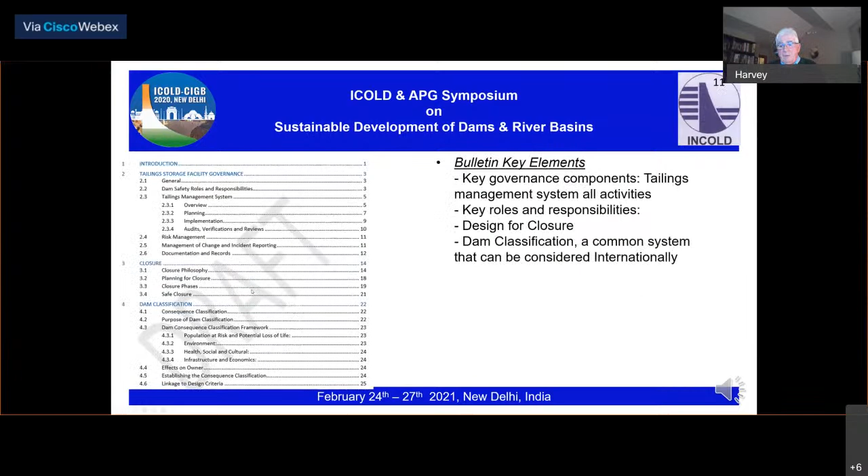They can vary from very brittle, sensitive slime tailings, like at Brumadinho and those failures, or you can go to hard rock tailings. So there's many different types of tailings, and we have categorized them into 5 different categories. Understanding the properties of your tailings is a key element in a safe tailings dam design.

I guess the most meaty part of the whole bulletin is on design. The design is critical. With a good design, you have very few problems during the life of a mine. So starting with a very good design is really an important element of tailings dam safety.

So we cover the different life phases from site selection, technology selection, through to design, construction, and all the way to closure, and finally safe closure, as we use the term.

A key element in all of the design is risk informed. You want to understand how the dam could fail and be designing your dam to prevent that. If you think about it, the main dam failure modes — dams fail on foundations, like Mount Polley and Aznalcollar in Spain.

They can fail by overtopping, like Baia Mare and other projects. They can fail with broken decants, releasing materials. They can fail within the dam itself, which was the liquefaction failures in Brazil. And there's natural hazards — you can have landslides and, in northern climates, snow avalanches.

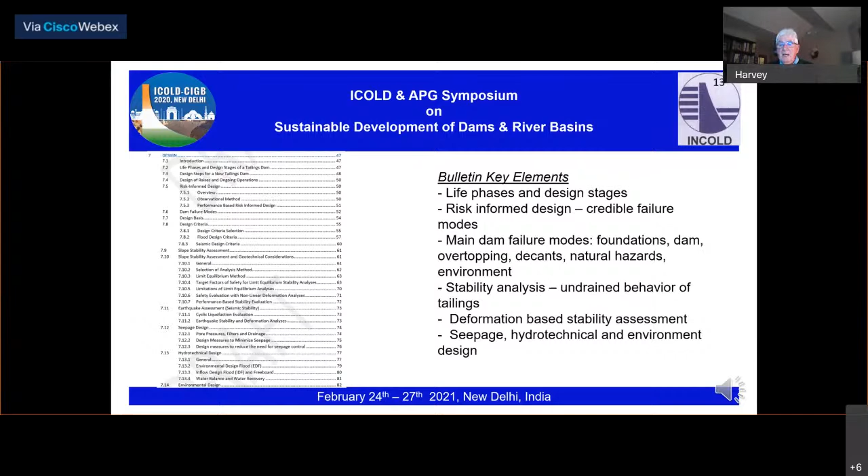So the practice of using drained factors of safety is not correct or practical for tailings facilities. We'll get into deformation-based analysis — you can look at deformation for designing your dam as opposed to factors of safety, or in conjunction with it. And certainly seepage and hydrotechnical environmental design.

So the next sections cover risk management and dam failure analysis. This is looking at what can go wrong if the dam starts to fail. What are your trigger action response plans for how you may respond to things?

Also, when we look at how tailings dams fail, they're remarkably different than water dams. Water dams, if the dam fails, all the water goes out. With tailings dams, they don't — some may have more go out, and some may have very little tailings go out.

So there's really two mechanisms. You've got the water transported tailings — if you have a cubic meter of water, it could wash away a cubic meter of tailings. Secondly, there's what I call the geotechnical mechanism: if there's potential for liquefaction or unconsolidated tailings near the upper part of the tailings facility, those can flow. And then lastly, emergency preparedness and response planning in the event that something does happen.

The other key elements we cover, and these are the last few, are the construction aspects, having good QA/QC, and probably the biggest, or a significant issue there, is having good as-constructed records of your dam — not just geometry, but knowing the geotechnical conditions all the way through your dam.

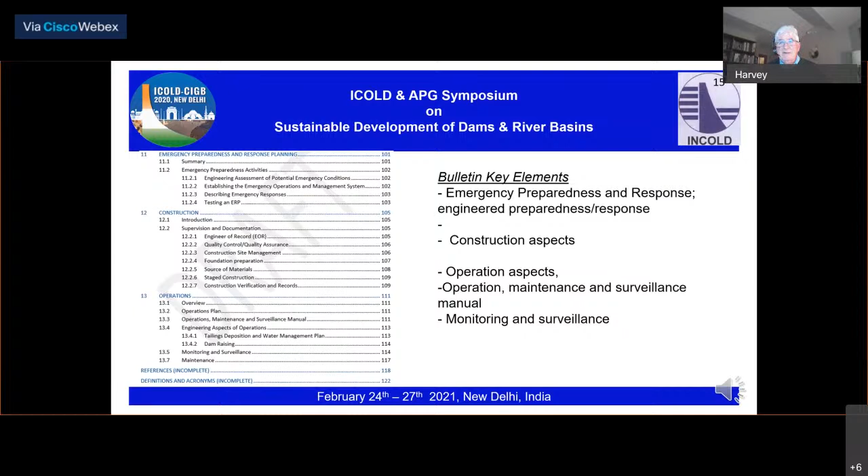So in summary, the Dam Safety Bulletin covers comprehensive components of dam safety and governance. It's aligned with the global standard and ICMM guidance, and it's to be submitted to ICOLD Central Office for approval in Marseille and ICOLD later this year, COVID willing. So we hope that goes well. And that concludes my talk. So thank you very much.

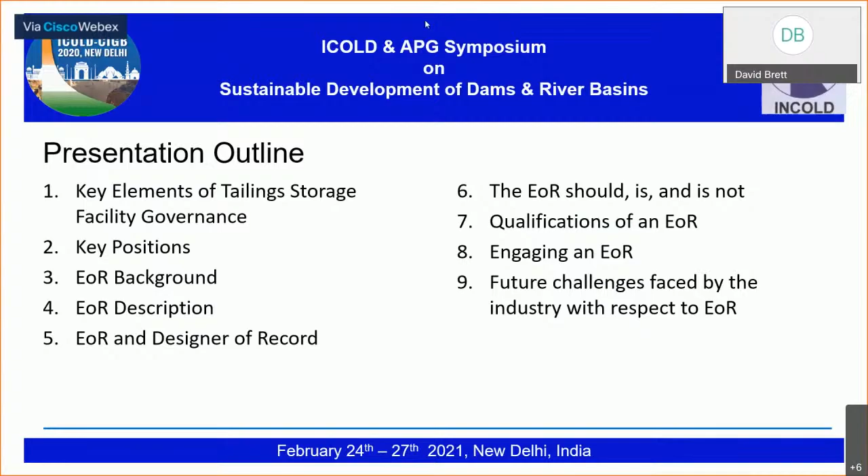We've lost you, Andy, you have no sound. So Harvey, yeah, maybe you could run the presentation from the server. Okay, let me just... So for those of you that are listening, sorry, the internet I'm working from is a bit spotty, so I have pre-recorded the presentation and Harvey's going to play it on his improved internet. Yeah, okay, let's see if technology works, Andy. So I just press slideshow and start. Yeah, share your screen. Yeah. And then just press slideshow. I don't know if there's sound, Andy. Okay, no, I don't. Okay, so I'll take the sharing back. My apologies, I'll take the sharing back and I'll just run it through. Okay, and hopefully it'll work.

As I was saying, there's several items in this presentation dealing with key elements of tailings storage facility governance, but truly what we're focusing on is engineer of record, with description, qualifications, and how an EOR should be engaged.

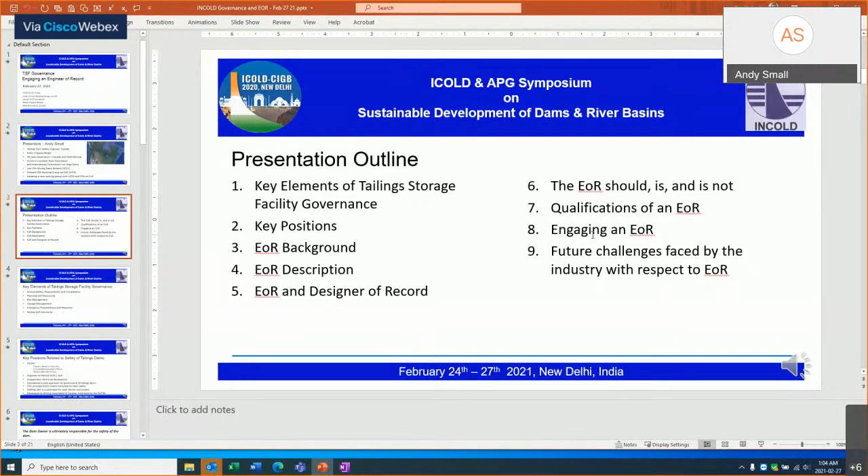How's the audio now, David? It's good, Andy, it's good. Okay, thank you, okay.

In terms of key elements of the tailings storage facility governance, there's accountabilities, responsibility, competencies, planning and resourcing, having a risk management program, a change management program, a plan for emergency preparedness and response, and review and assurance.

Key positions related to the safety of tailings dams include the owners group, which has a board of directors, accountable executive officer, responsible site person. Then there's the engineer of record, typically a consultant, and independent technical reviewers, which support the owner. This approach has been considered a solid approach for governance of tailings dams.

Within the Canadian Dam Association, as part of the governance guidance we've provided for engineer of record, we've developed a RASCI matrix. RASCI stands for Responsible, Accountable, Support, Consulted, and Informed, and that template is available for you. It has 55 best practices for tailings management and dam safety management, and it allows you an opportunity to identify the roles and responsibilities of the different positions. In doing so, you can develop a staffing plan customized for every owner and every project.

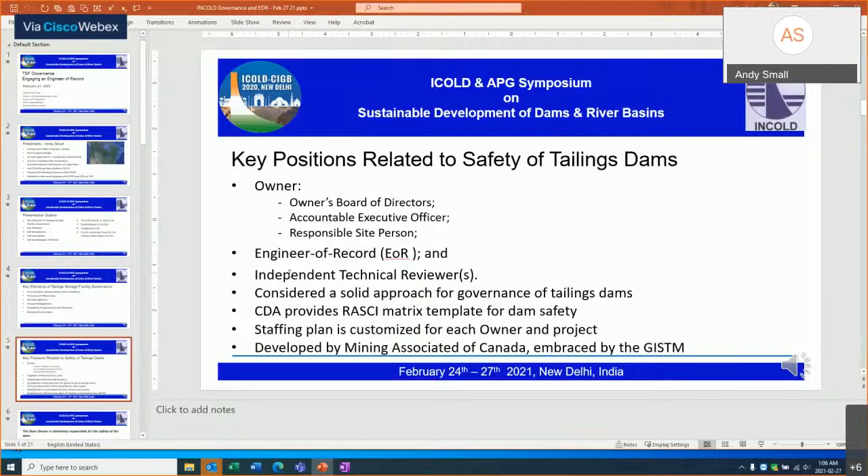This whole approach was developed first by the Mining Association of Canada and is embraced by the GISTM. I am not activating the slide view on purpose because of the audio recording interfering with what I'm doing now.

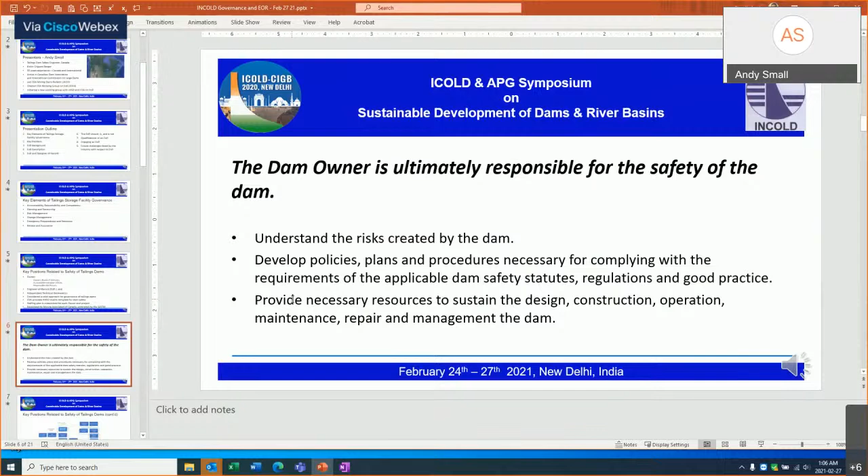So the dam owner is ultimately responsible for the safety of the dam. They need to understand the risks created by the dam. They develop policies, plans, and procedures necessary for complying with the requirements of the applicable dam safety statutes, regulations, and practice. Now, obviously, the dam owner has to provide the necessary resources to sustain the design and so on.

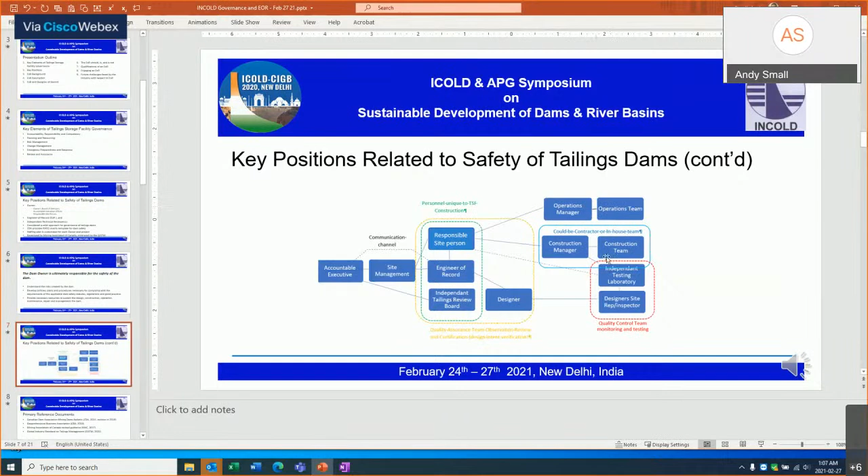There's a number of documents that have been developed related to governance and engineer of record. We first formalized the engineer of record concept in the CDA bulletin that we issued in 2014. The Geoprofessional Business Association in the United States then took that concept and advanced it further. The Mining Association of Canada did the same. When these two organizations made their progress, we in the Canadian Dam Association cycled back and did a major revision of our governance and EOR section of 2019. All of that was then used by the GISTM. So what was presented in GISTM is an extension of the previous work.

As I said, the EOR concept was initially formalized in 2014 in our Mining Dams Bulletin in Canada, and it was done so to provide continuity. As Harvey said, at Mount Polley, there were 5 different engineers of record involved, and that was viewed as part of the problem with the facility. We saw the same at the Samarco Dam failure. There are other examples of that. So the EOR concept fundamentally was to provide continuity.

It's related to the dam safety aspects of the site. It makes a big difference with risk management. It assists the overall risk management program on a site, and therefore improves the project performance and dam safety.

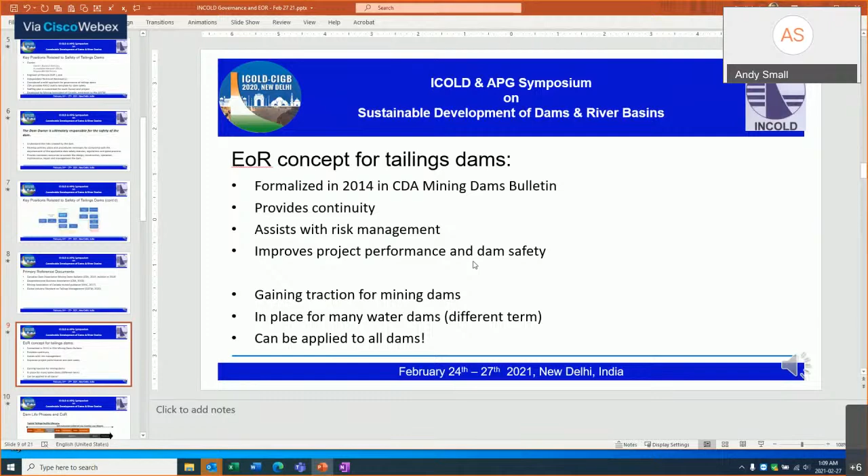This concept has been getting a lot of traction for tailings dams and for mining dams. In many places, there are many sites with a number of dams, not just tailings dams. There can be water dams, water treatment dams, and so on. Many sites are now adopting EORs for all the dams on their sites, not just tailings dams. We also recognize that our colleagues in the water dam industry typically have this type of position as well, but they may not actually call it engineer of record. They may call it something like a dam safety engineer. But we believe that this concept can be applied to all dams.

When we look at the dam life phases and the EOR involvement, the EOR should be involved from the initial design and construction through commissioning, and if there's further designs and construction for raises of the tailings dam, and out into closure. The question is often asked, is an EOR required for closure? And the answer is yes.

So within the ICOLD document, we have a description of the engineer of record. We state the EOR is responsible for advising the owner and other appropriate stakeholders as to whether the TSF is designed with appropriate concern for health, safety, and environment, in alignment with the current state of practice and in accordance with applicable regulations, statutes, and guidelines. The EOR further advises the owner whether the construction of the facility conforms to the design concept and provides critical support during operations.

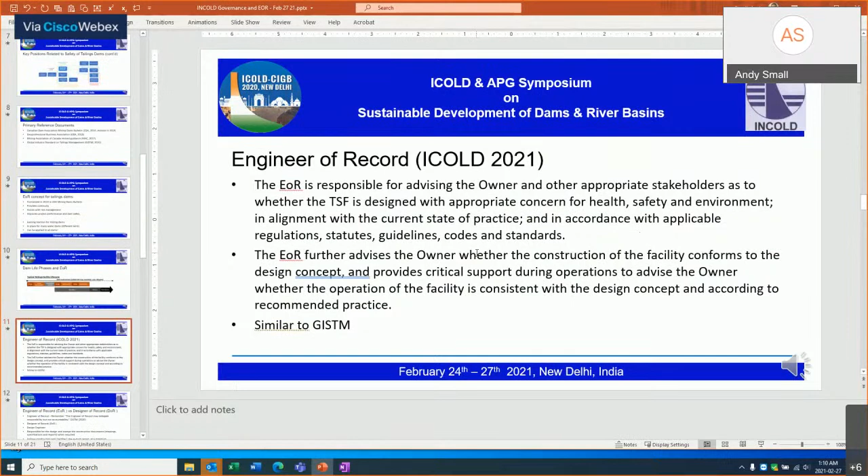Now, in the past, in the Mining Dams Bulletin of 2014 of CDA, we said that the EOR was responsible for the safety of the dam, and that's incorrect. The owner is responsible for the safety of the dam, and through these functions, the EOR provides support to the owner and effectively becomes a partner with the owner. So the ICOLD document provides more information on that. The Global Industry Standard on Tailings talks about it as well. There's obviously MAC and CDA has it, but the definitions are all very consistent.

I indicated earlier how the designer of record and engineer of record may not be the same. There are many times the engineer of record is the same as the designer of record, or is the lead designer for a particular tailings dam or a raise, but not always. There are many cases where the engineer of record delegates that responsibility to the designer of record. The designer of record is also referred to as a design engineer. The designer of record is the one that's responsible for the design, stamps the construction drawings, specifications, and reports, and so on. The design engineer, designer of record, then follows the construction, provides support during the construction, and certifies the as-built report.

Now, if the designer of record is different than the engineer of record, the engineer of record may delegate that responsibility but cannot release that accountability. The engineer of record still retains accountability for the overall safety.

There are many different models for the roles of the designer of record and engineer of record that also account for situations where the designer of record may work for a different firm than the engineer of record.

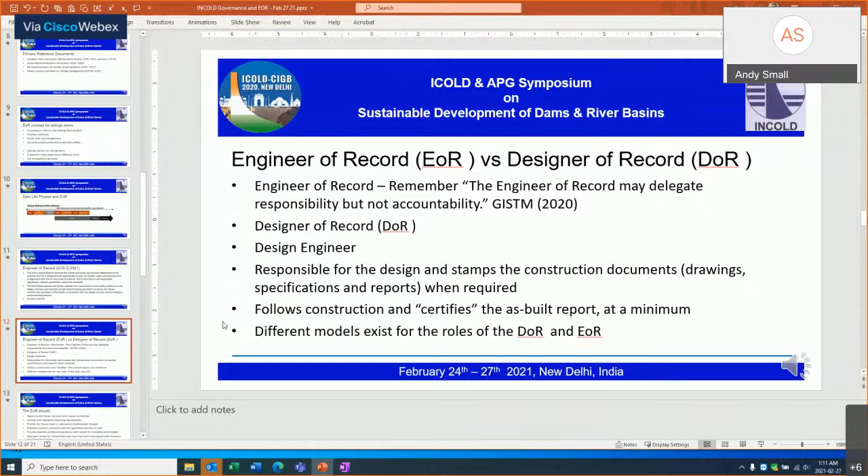The engineer of record should report to the owner concerns they have with respect to the dam, ensure the dam system complies with regulatory reporting requirements, provide the owner input on planned or implemented changes, maintain practices consistent with the applicable standard of care, and provide objective professional guidance with respect to innovative technologies.

Some innovative technologies are suitable and others are not. The EOR should seek peer review for critical items and input from technical experts with necessary specialized knowledge. EORs need to park their ego at the door.

The EOR is an integral part of the dam safety risk management team. As I said earlier, they're a partner, a trusted advisor. It can take time to develop that relationship—maybe 1 to 3 years—but ultimately you become a partner and a trusted advisor.

The EOR is typically an individual supported by a firm and a team of dam safety specialists. There are some areas where the EOR is viewed as a firm rather than an individual, but within ICOLD, the GISTM, and CDA, we clearly say the EOR should be an individual. That individual is likely not a sole practitioner; they need a team of specialists supporting them as they undertake their responsibilities.

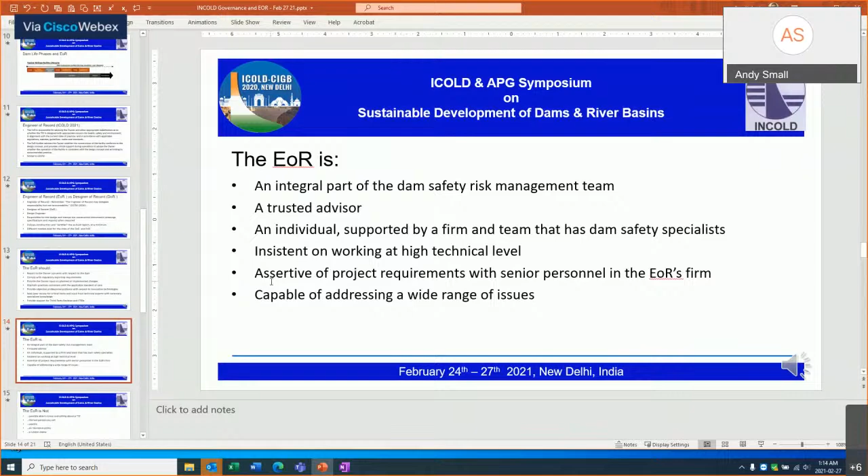The EOR is capable of addressing a wide range of issues and is much more than a designer. The EOR has to deal with operations, maintenance, surveillance programs, closure, training, competencies, and management, and must have an awareness of all these issues to do their job.

The EOR is not the person who knows everything about a TSF. The EOR is not on site—they're typically a consultant, so they can't know everything about the TSF. The people on site, the responsible person and their supporting team, are integral to this, and that partnership is necessary to handle all the issues about a TSF.

The EOR is not the last person you call, not the person who gets the call when there's already a problem. Typically the EOR is advised early on. Our best day is when a client calls and says, 'We've got something a little different happening on our dam, we'd like to advise you about it,' and the EOR says, 'I hear you, thank you for your call, but it's really not a big deal.' Many trigger action response plans show the EOR engaged very early in the surveillance program when abnormal conditions are observed, so they're not the last person.

The EOR is not psychic—they cannot read the owner's mind. So communication with the EOR is very critical, typically involving calls every week or every month with the client discussing the dam safety programs.

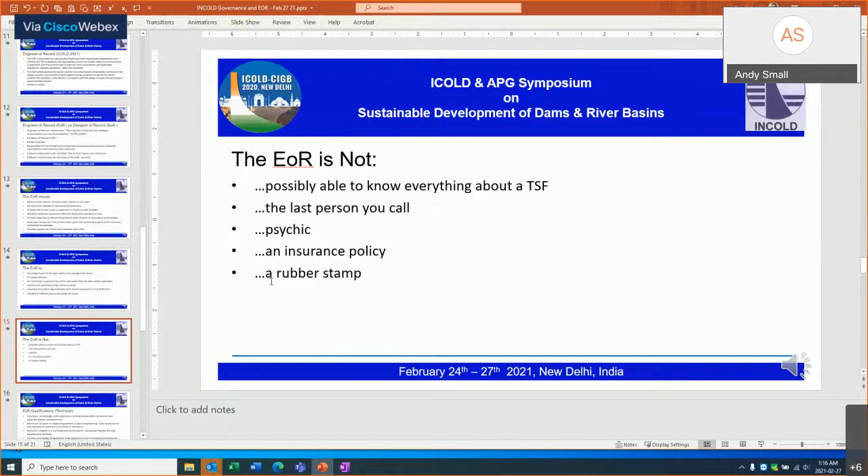So I have two slides related to qualifications. The first is on the technical aspects, and the second is on the non-technical.

From a technical perspective, the EOR needs to have the education, knowledge, and experience commensurate with the complexity and potential failure consequences. So when you read the MAC guidance and GIS-TM guidance, this is what it says. However, within CDA, we suggest there be a minimum of 10 years of related experience in dams engineering, and obviously that minimum needs to be higher for dams in the very high and extreme consequence categories. As I said earlier, the EOR has to have a breadth of knowledge, not just design - they need to understand construction and operations. Those are critical aspects in the education of the EOR. Many companies providing EOR services now are developing training programs for their staff to understand the different aspects of dam safety.

EOR needs to have a bachelor's degree in civil engineering, typically geotech. There are occasions when a hydrotechnical engineer may be able to take on the EOR role. It's not unusual - it's just that I think the vast majority of EORs are geotechnical engineers.

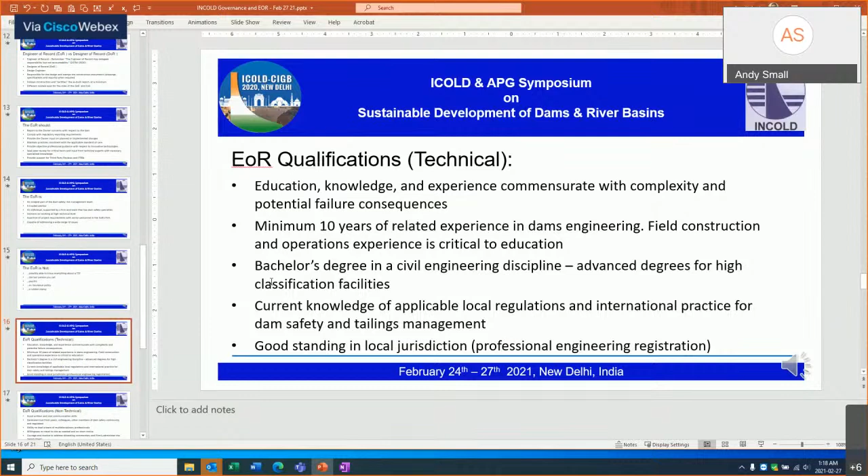In particular, high classification facilities warrant advanced degrees. The EOR needs knowledge of applicable local regulations and international practices, and they need to be in good standing in their local jurisdictions. In many countries there's a professional engineering registration process, and they need to have their PEng designation. But not all countries in the world have that designation, so that's why we write that the EOR needs to have good standing in their local jurisdiction.

With respect to non-technical qualifications, the EOR needs good written and oral communication skills. They need to be able to generate trust from their peers and colleagues, other members of the community, and regulators. Many of our dams require multidisciplinary teams, and the EOR needs to be able to lead that, go to site, have the courage to deal with dissenting commentary, and firmly administer the design intent - all of which requires a high degree of emotional intelligence.

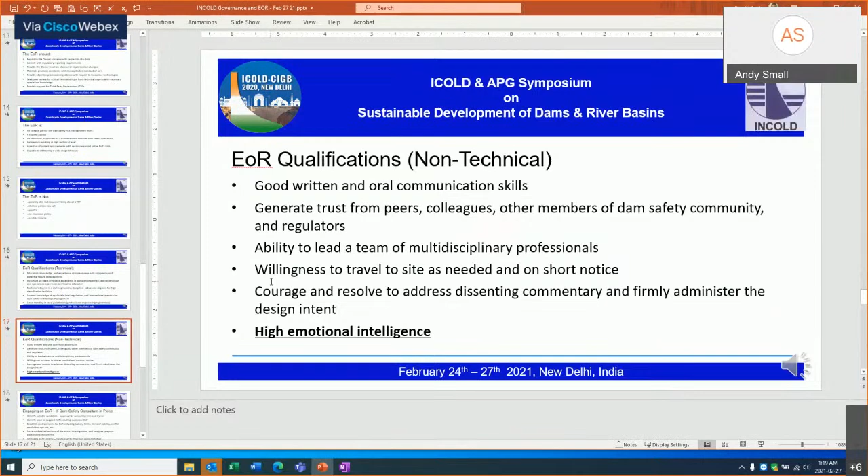Contractual terms need to be defined, including the battery limits - which dams are in and out of the scope. The limits of liability are very important. We're aware of some companies, some owners, that are now waiving the limitations of liability from their contracts. They are not expecting the engineer of record firm to be held liable for problems associated with the dam. They're doing that because they know of the concern that many consulting firms have with regard to liability transference, and therefore their hesitation to become involved as engineer of record.

And the companies waiving those limitations of liability are doing so because what they want to focus on is the partnership and trust aspects of the EOR, and not have the elephant in the room related to liability issues.

There should be a conflict resolution mechanism, because there will be times when the EOR and the owner do not agree, and what's the process for resolving those conflicts, as well as the conditions under which the EOR or the owner can opt out of the agreement. So all those things need to be sorted out.

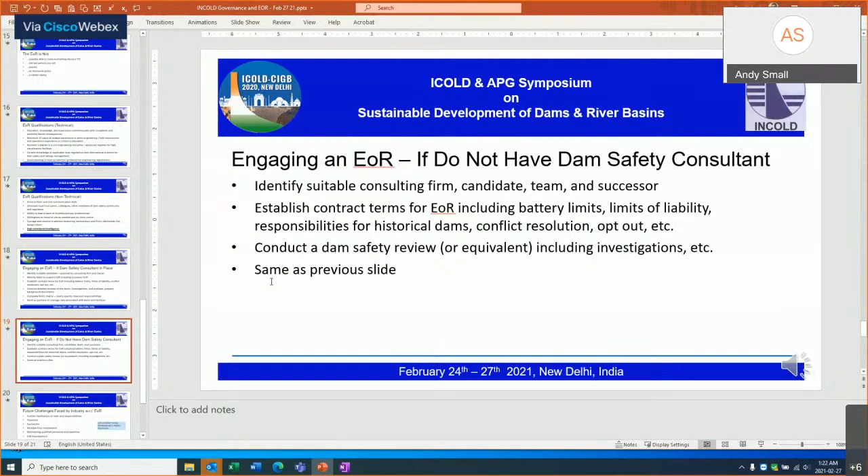In this particular case, that third bullet may take between 1 and 3 years before the EOR team and the EOR are satisfied that they understand enough about the dam, understand the risks associated with the dam, before they can formally take on the EOR role. Otherwise, it's the same as the previous slide.

So the Canadian Dam Association and the United States Society of Dams are now forming a working group to address these issues. We had one webinar in December of 2020. We have additional webinars and workshops planned for the upcoming year. So that is my presentation.

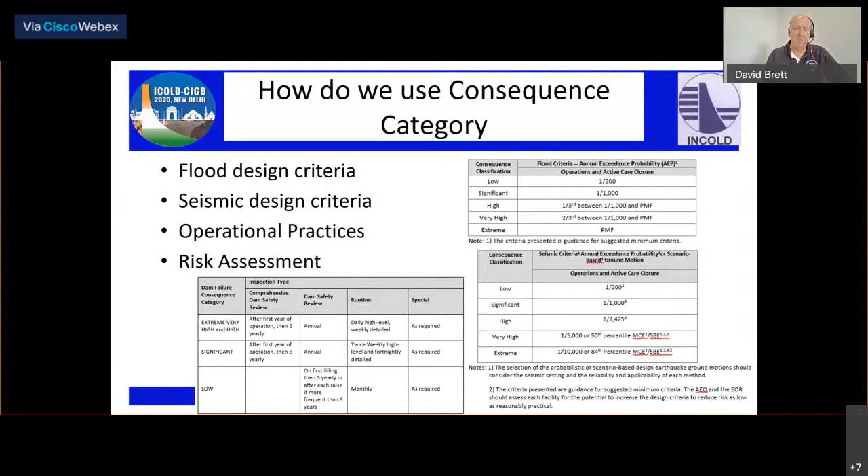But this is the secret of determining a good consequence category: first identify the credible failure modes. The sort of failure modes we might consider would be instability due to foundation failure, which could be caused by weak material, incorrect strength assumptions, incorrect seismic hazards (bigger earthquakes than expected), and unexpected pore pressures.

This really focuses on needing to forget about likelihood. We're not looking at something we might expect to happen fairly easily and then talk ourselves into thinking it's not going to happen, so it's not credible. We really need to think there could be factors like weak zones that we haven't interpreted properly, and that does cause the failure.

And if it did, well, what are the consequences? When you do that and find that consequences are high or extreme, it focuses your attention that we really need to do a thorough geotechnical investigation to make sure you understand the foundations as best as you can.

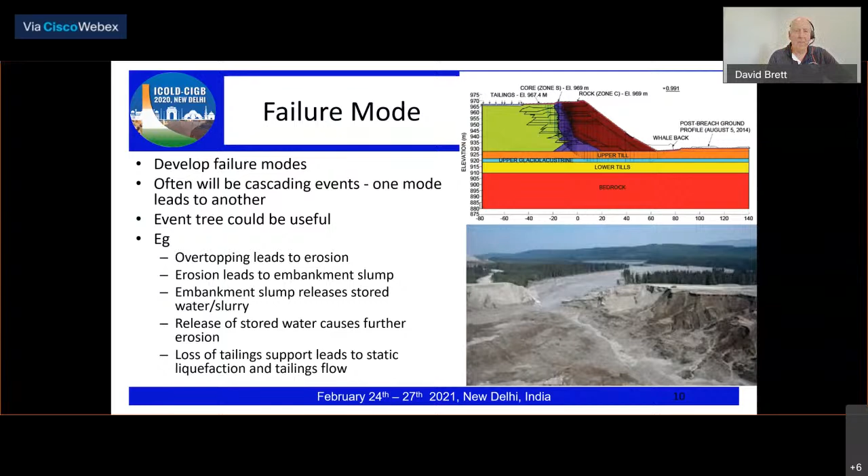Like Harvey mentioned before, tailings dam breaches can be very different to water dams. If there is water in the dam, then potentially the initial flow of material out of the dam would be water, but potentially taking a lot of tailings with it. This approximation of 50% solids density is quite often made.

And once that occurs, we could then get a slump of higher density material. So there could be a liquid flow phase that would travel a long distance, and then there could be more of a landslide type of failure mode that might be more localized, but very, very deep. So those things need to be looked at.

We also look at a couple of different cases for dam failures. First of all, a fair weather or sunny day failure, which is where there's no unusual water on the dam and no downstream flooding. So this would be pretty much normal operating conditions, and you'd need to look at what credible failure modes you might have in that situation.

So that photo on the right, that's the Mount Polley Dam in Canada, and that is a good example of a sunny day failure. There was no water on that dam or nowhere near the failure. It was just a slump of material that occurred.

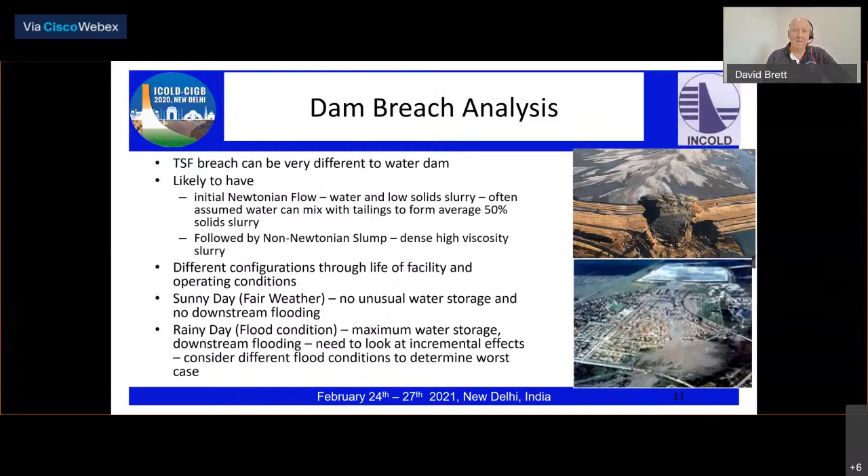We really have to remember that this is a developing science and we haven't got an agreed model methodology. There are a lot of people developing models, and you can probably buy some computer programs that claim to do various things, but at the end of the day there's a lot of variables and we really don't pretend to understand everything as yet. So we need a lot of engineering judgment when developing these dam breach models.

We can vary from the very simplistic method where you might assume that everything was water and it flowed out like water, which is probably going to get you a very conservative extent of flood in terms of the area covered and the distance, but it's probably going to be very conservative and unrealistic.

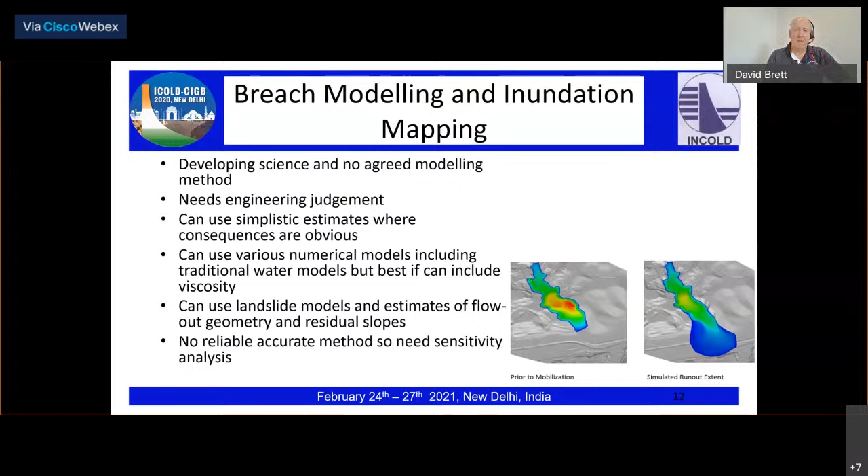So once we've done this flood mapping, we can then define the inundation areas. We can count houses or look at populations or industries that are in the flood zone and estimate the population at risk.

We can also use various methods to calculate the potential loss of life, and this is very influenced by warning time. We have to be careful we don't use some of the rules developed for water dams, because in water dams, a depth of water less than 0.5 metre and flowing at less than 1 metre a second is thought unlikely to wash people over and cause them to drown or lose their life. But I think you have to recognise tailings are different, they're much denser and more force is involved. So we just need to be careful not to use some of these water flood criteria.

And then we also have to look at the damage to the environment and the community infrastructure, etc.

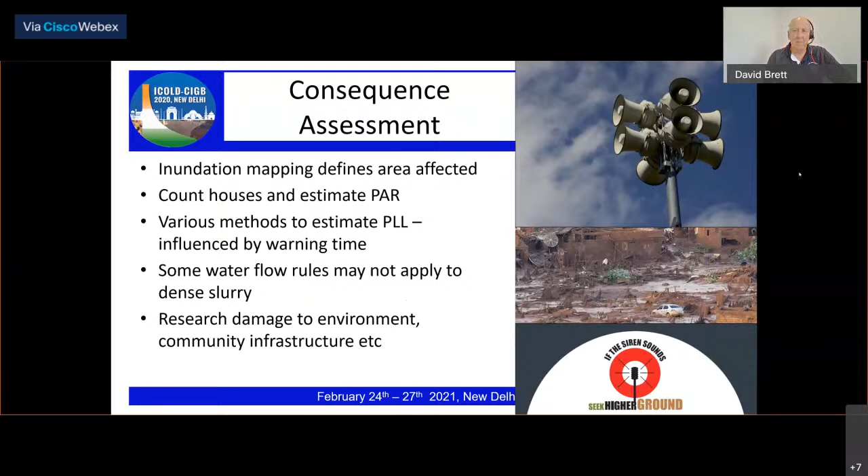One of the other uses for dam breach analysis is for emergency planning. There's a bit of debate about this - what dam breach should you use for your emergency planning? As far as emergency planning goes, it's probably not necessary to use the most credible failure mode that is very extreme.

If you've done your designs and can handle a probable maximum flood or something like that, you might be able to come up with a flood, a seismic event, or a failure of whatever kind that is maybe more realistic in terms of doing your inundation mapping for emergency planning. So you just need to do a bit of sensitivity analysis, looking at different flood cases to see what's a realistic thing to look at for your emergency planning.

Things you might consider when looking at your flood extent would be warning times, warning methods, safe areas, emergency access and escape routes, response method and equipment needs, and lists of agencies and contact details.

So, once again, it's just a matter of developing an emergency plan based on a realistic scenario, rather than something that is pretty much very, very unlikely. It depends - you might need to consider the effect of that, but make sure you plan your resources appropriately.

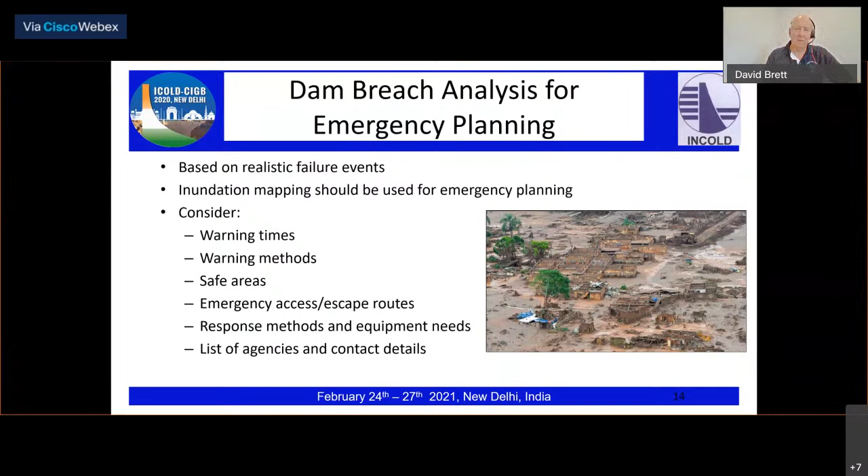So the consequence category is something that does become publicly known. We need to be educating the public to understand what that really means - it shouldn't be related to risk, and needs to be taken as what is the worst possible outcome. But hopefully we can demonstrate to the public that the consequence category has been used to drive down the risk so that it's very, very low for some of these extreme consequence dams.

And it's important, in my opinion, that when considering the consequence category we don't try and drive it down to reduce that public outcome. If we've got an extreme consequence dam, we should recognise it and develop our designs appropriately. It'd be silly to try and drive that category down so that we ended up with lower design parameters and actually left it with a higher risk than otherwise.

So, to me, having a conservative consequence category allows decision making to reduce risk, and that's what it's really all about. So thank you, Harvey.

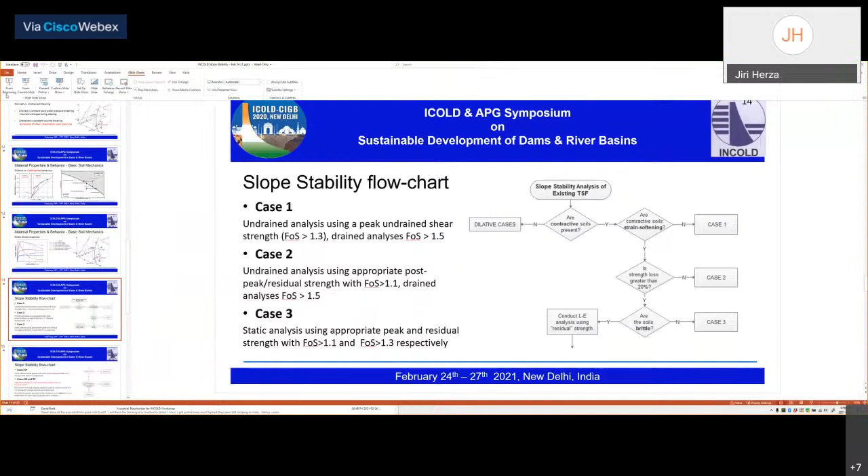So I'll share the screen. Okay, I can see it now. Thank you. Okay, thank you, Javi. Let's get into it.

As Javi said, I'm currently in Czech Republic finishing my PhD studies into soil mechanics, closely related to tailing slope stability. I don't want to talk too much about myself, so let's move on to the next slide.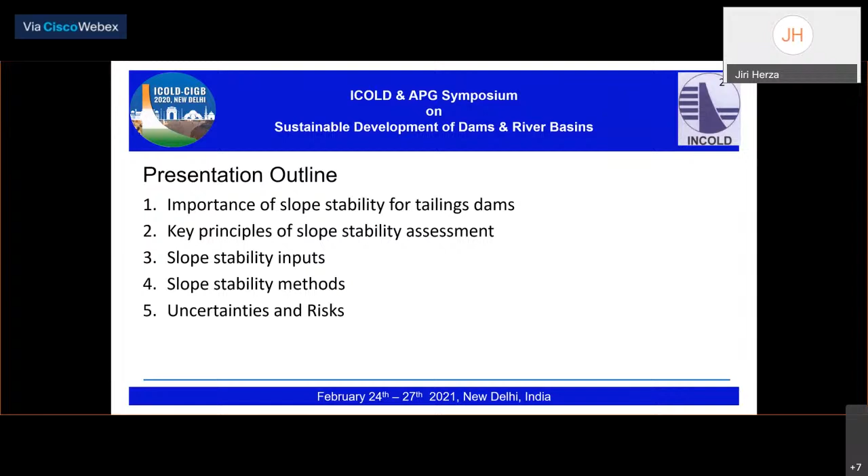Today I'll be presenting a short presentation on slope stability assessment. I will go through why slope stability for tailings is important. We'll explain some of the key principles of the assessment, what inputs we need, what methods we use, how we assess the outcomes of risk analysis, and I'll briefly touch on uncertainties and risks associated with our slope stability assessment.

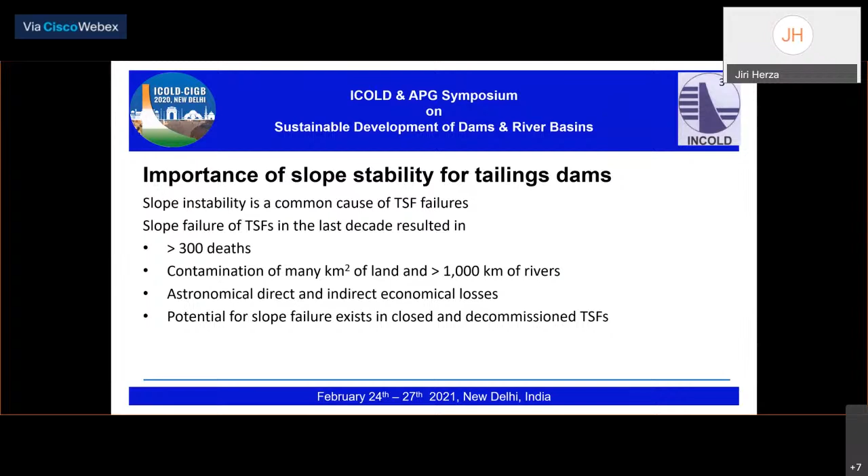Slope instability is one of the very common causes for tailings failure. In the last decade, slope instabilities resulted in the deaths of more than 300 people, contamination of many square kilometers of land and long stretches of rivers, and indeed astronomical direct and indirect economic losses.

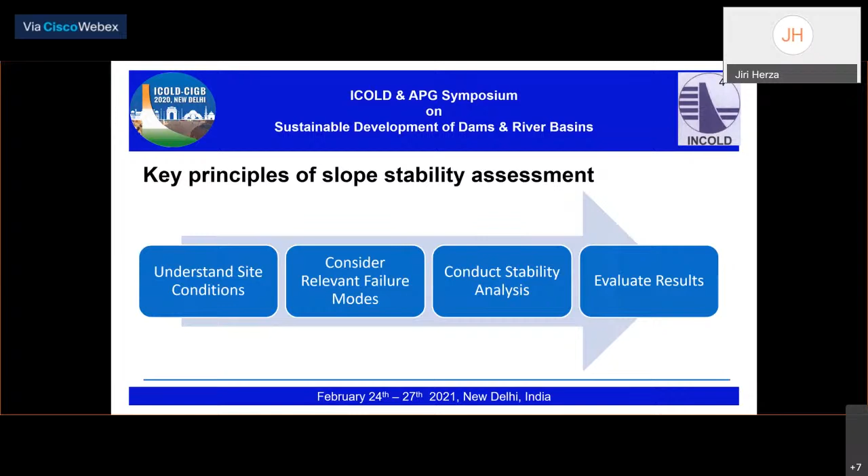What's important when we run a stability assessment is to understand that it's not just a calculation. The calculation is part of the process of the assessment, but the assessment itself is a number of steps joined together. First, we have to understand the site conditions. We have to understand the relevant failure modes and consider those in our assessments. We then run through the stability assessment calculations, the stability analysis, and then we need to consider the outcomes of the stability assessment.

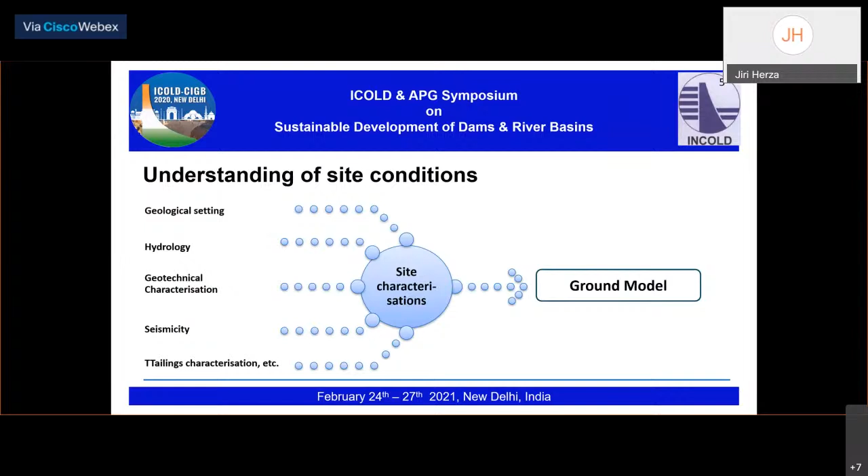So when we put together a ground model, we basically compile all relevant site conditions. The ground model is a reference point that is used to feed information about our site into our slope stability assessment. After we set up the ground model, which contains information about the geology, geotechnical conditions, seismicity, hydrogeology, groundwater table, and other important factors of our site, we can go into further detail.

We then go into a slope failure selection, because we need to understand what cross-sections and what parts of the tailings dam we might want to consider for slope stability. Different sites, different locations, or breaches in those locations might have different consequences. So selection of the sections and geometries which we are going to analyze is very important.

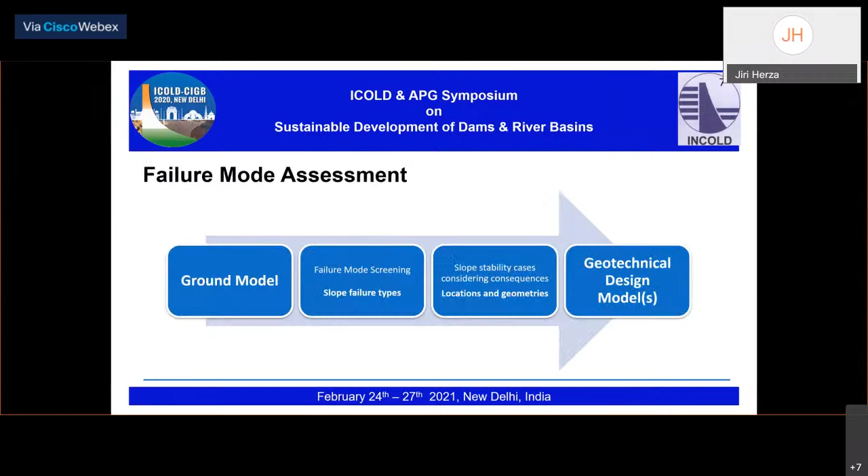Then we go through the slope stability cases for those different consequences, and we implement them in a geotechnical design model. The geotechnical design model is a modification of the ground model, and the modification is in the adoption of the geometry we are interested in, and in the material zoning that is relevant to our failure mode and the location of our assessment. So from ground model, we go to a geotechnical model, and then once we have the geotechnical model assembled, we can run the stability analysis.

The stability analysis is the numerical evaluation of the performance of the slope stability of our dam based on the geotechnical design model we have selected. The calculations might be run in a number of environments. We can run a limit equilibrium, which is still the most common software package or method used. We can use finite element analysis or finite difference analysis, depending on the input parameters and importance of the structure and what we want to get out of our analysis.

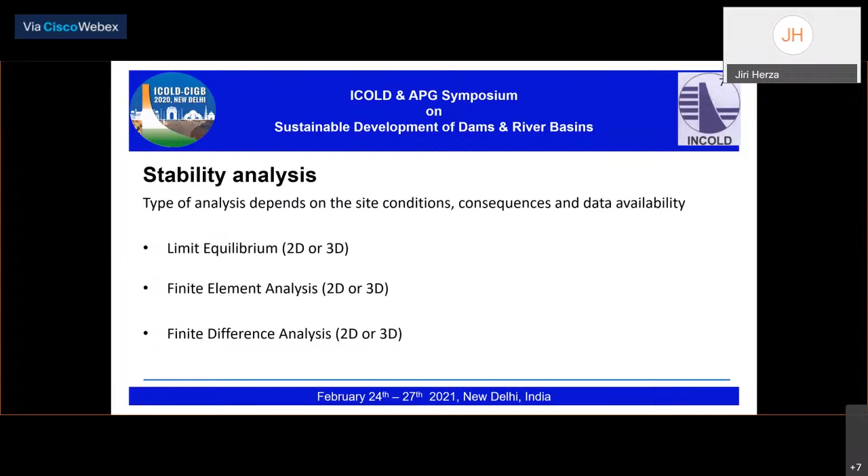The next step in the slope stability assessment, after evaluating the factor of safety or deformations of our slopes of interest, is to evaluate those results. What evaluation typically involves is a comparison of the results with the minimum or target requirements taken from international guidelines, bulletins, or local requirements defined by government.

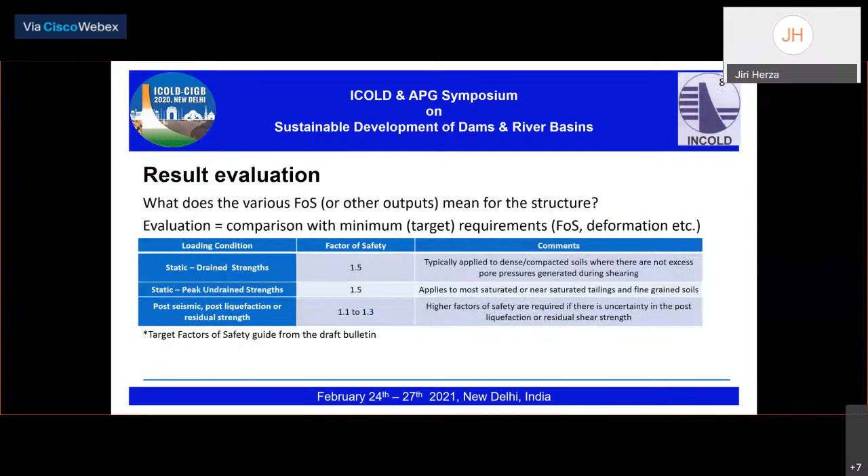In our draft tailings bulletin, we suggest that the minimum factors of safety are as per the table now shared on the screen. For the static drained conditions, we target a factor of safety of 1.5. For peak undrained conditions as well, and the post-seismic and post-liquefaction cases using residual strength or post-liquefied strength of the tailings, we have a range of 1.1 to 1.3, with the higher factor of safety required for cases where we have high uncertainty in the shear strength parameter used for the post-liquefaction case.

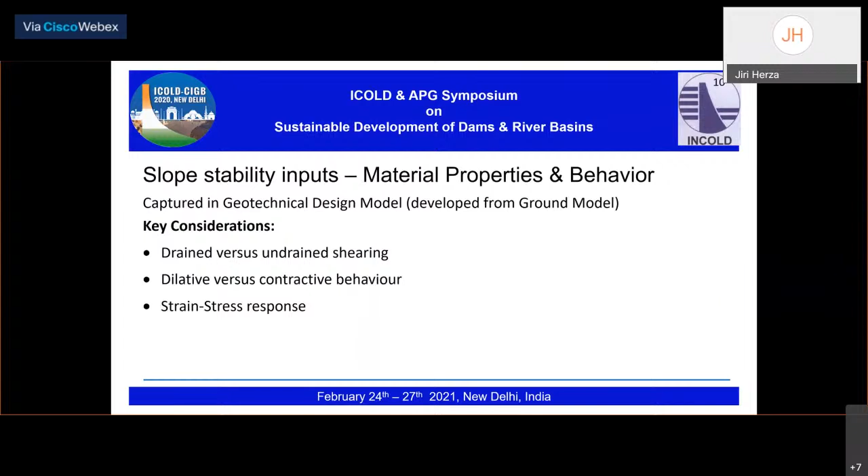The key considerations are the drained versus undrained shearing, dilative versus contractive behavior, and the strain-stress response of the soil during shearing.

The difference between drained and undrained shearing is crucial. The assumption is that under drained shearing, we will have constant pore water pressure, irrespective of how long we shear the material. Drained conditions are typically used for unsaturated soils, where there is little water content within the soil matrix, or for soils where it's certain that the permeability will dissipate any pore water pressures caused by external loading. The opposite of drained condition is the undrained condition, also called constant volume shearing.

Under these conditions, the initial pore water level changes as the shearing occurs, and the generation of shear-induced pore water pressures might severely impact the slope stability, because the shear resistance of our soil is directly proportional to the normal stresses acting on the soil aggregate. Any increase in pore water pressure reduces those normal stresses and results in reduced shear resistance of the soil. So for any assessment, it's crucial to understand the likelihood or the potential for undrained conditions to develop.

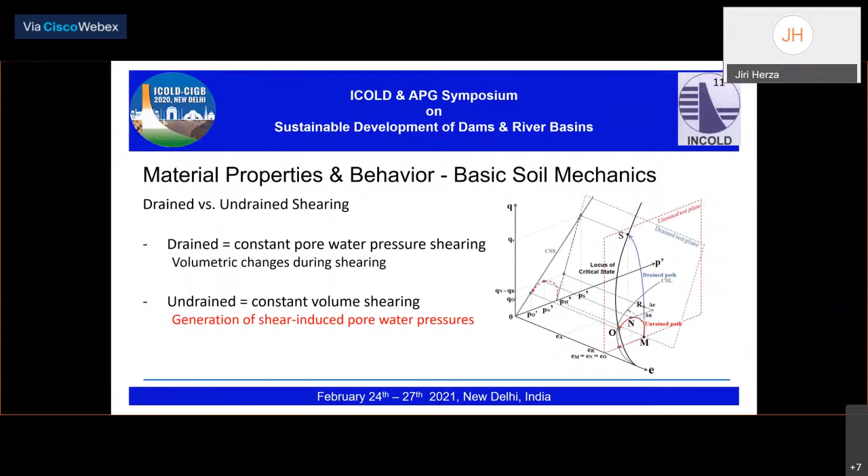The last important element of soil behavior understanding is the stress-strain response. So what that means is we need to understand what happens as the soils are being sheared, and axial strains or any shear strain is developing. Some soils, upon shearing, are increasing their shear resistance due to the internal changes of the soil matrix.

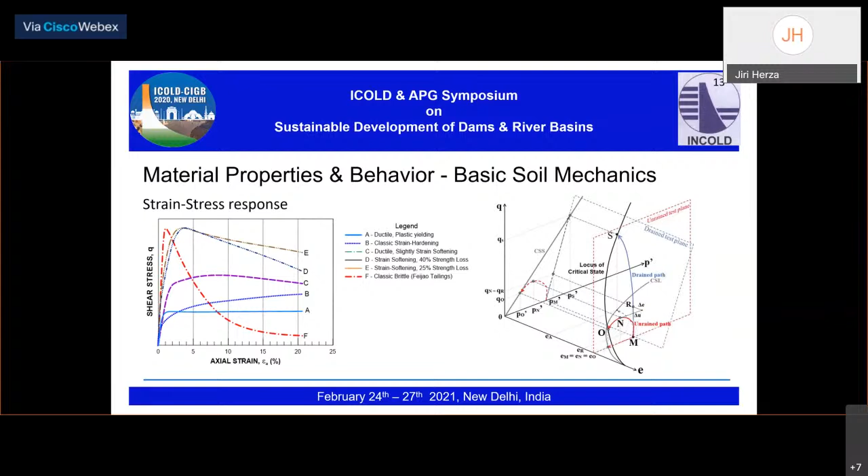We have split the typical situations we might come across while preparing slope assessments of tailings dams into 4 categories, and category 4 is then further split into subcategories.

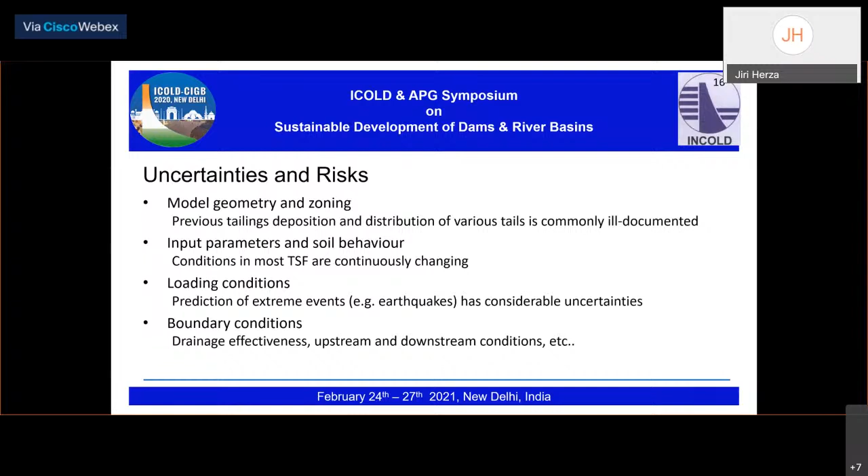The consequence of those uncertainties is that we either underestimate the slope stability, which results in uneconomical design and unhappy clients and owners, or in the worst case, we overestimate the slope stability, which might result in the need for additional works if the facility cannot be safely operated, or in the worst case scenario, potential failure.

Therefore, we suggest that uncertainty in slope stability assessments should be captured and communicated to allow for risk-informed decisions by the owners and operators of the facility, and this can be done through sensitivity or probabilistic representations of the results with careful explanation.

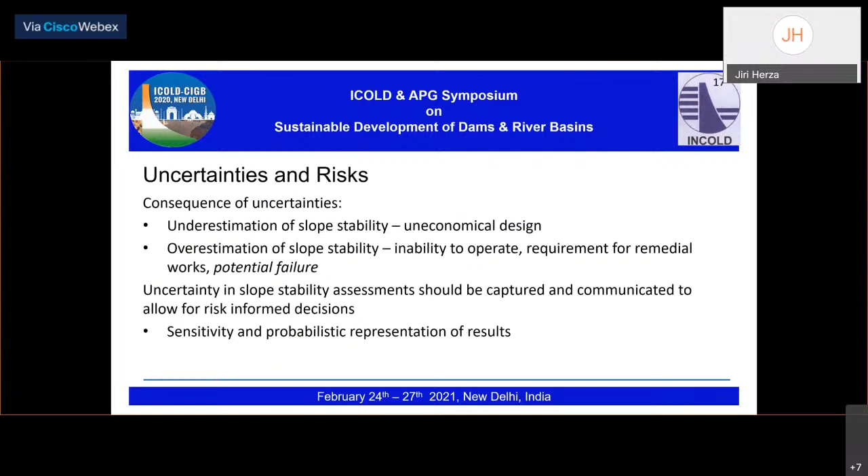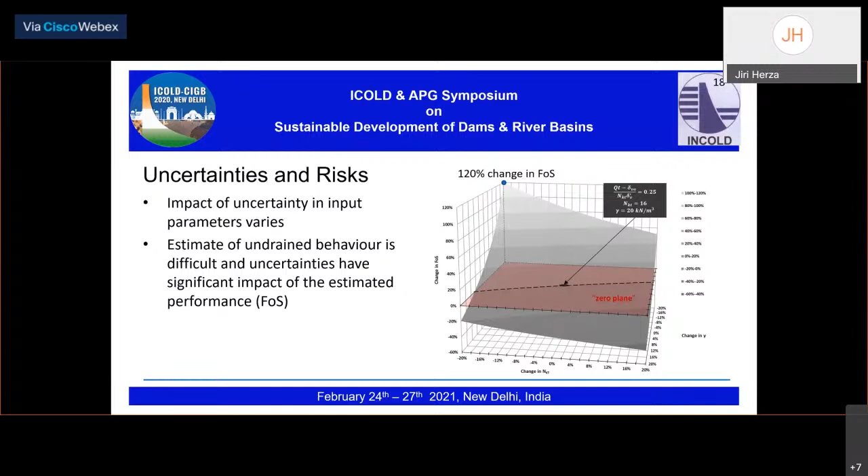Being mindful of these uncertainties and their potential consequences, we have to understand that the factor of safety is not going to save us. The factor of safety is there to allow for reasonable uncertainty and accounts for uncertainties in variability of the dam foundations, components, and zoning. But it does not allow for fundamental misunderstanding of the soil behavior or omission of critical parameters and conditions, and indeed it does not account for poor construction practices.

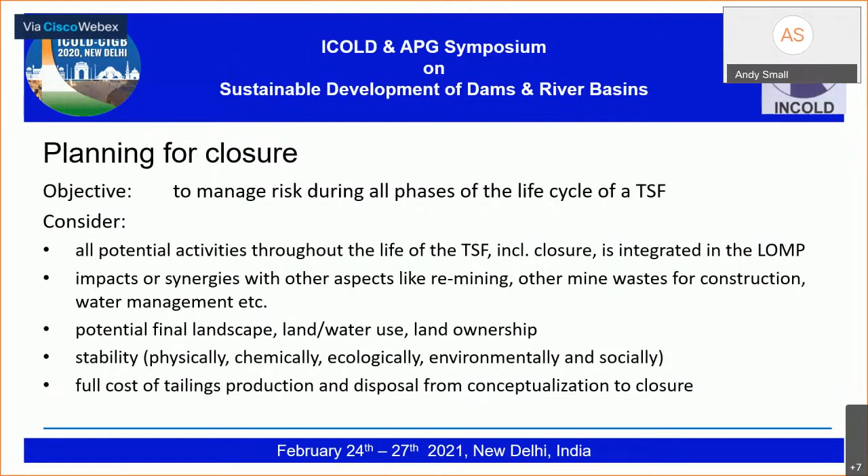There may be a period of active care, through either water treatment operations or maintenance of the facility for erosion and similar issues, where there's a full-time site presence. Ultimately, we're trying to get to a passive care condition, which is not necessarily a walk-away situation, and that's addressed in a later slide.

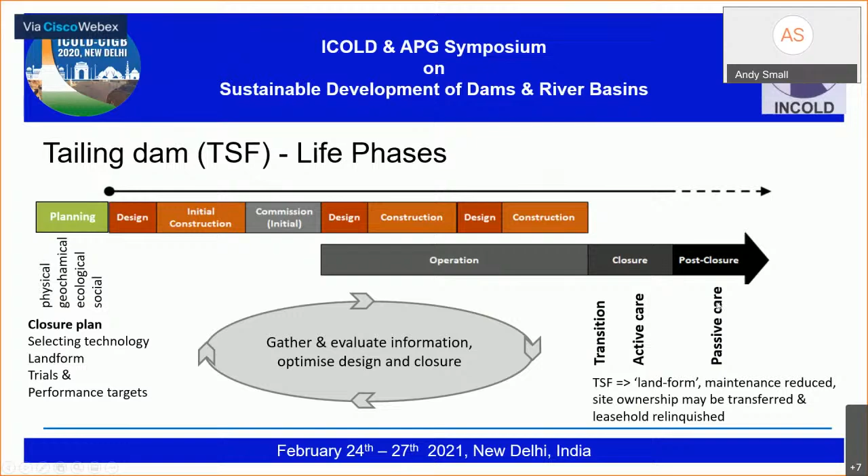So is it possible to create value through closure? How can we take land that was initially undisturbed and turn it back to a natural landscape? There are often communities or towns growing up around the mine, and how can that land be used for something?

So David, maybe it'd be appropriate for you to comment on these examples that you and Annika have provided.

So I guess this first one, Northumberlandia, Lady of the North, is a reshaped overburden dump in northern England, and whether you like it or not, it's a pretty interesting example of how you could actually plan some mining structures to end up being almost an artwork at the end. This particular one has public access walks and lakes, and it's a pretty interesting example.

Many people have heard of the Eden Project, where a clay pit has turned into a pretty amazing site with different venues focusing on environmental issues. And on the right there is an InterContinental hotel in China, which made a pretty amazing backdrop from an old mining pit. So that's probably three good examples of where mines themselves can be turned into something in the end that has people looking after them and sharing the liabilities ongoing.

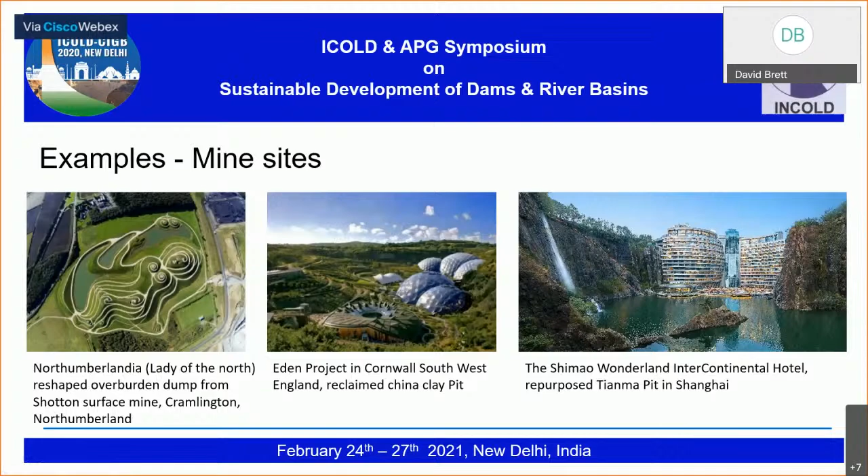So let's go to the next slide. I think I'll talk about a couple of tailings ones. Same thing, not quite as impressive probably, but for tailings dams themselves, there's been quite a few different uses made of those. In Australia, pretty commonly we would look at turning a tailings dam into a viable agricultural facility, and particularly grazing.

Also in Australia, the Kidston mine in North Queensland has been turned into a solar power station, where we've got a combination of pumped hydro and solar panels to utilise old mine workings, and the solar panels are put on the tailings dam, so it's a pretty innovative use.

In Arizona, there's a mine park that has been used for recreation. I think it might currently be closed because of mining developments, but it has been pretty well known in the past. And around the world, there's several golf courses that have been developed on tailings dams, and this one in Montana is pretty famous because it's got black slag bunkers. It'd be pretty interesting to play on that one.

So that is neat, David. Yeah, thanks, Andy. That's those.

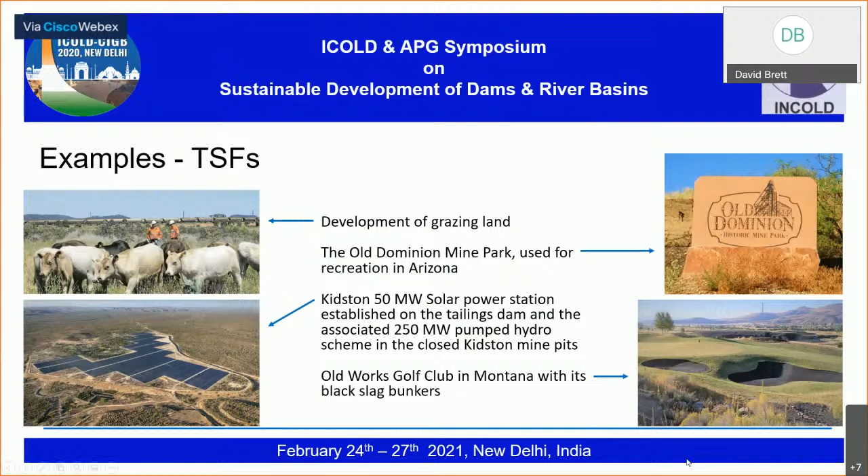That's good. Thank you. So when we're looking at creating value, who can be involved in that process? Well, there's obviously the mining company with their engineers and hydrologists and chemists and so on. But we're seeing more and more other specialists being brought into the mix, such as landscape architects. I'm going to show you a slide a little later on a new outfit called Landform Design Institute. Artists and historians, things we wouldn't have thought about 20 years ago, are being brought in.

When you look at the image David showed two slides earlier, that's not something engineers would typically have created. And then how do we interact with the community and the regulatory authorities and other stakeholders to actually achieve a closure configuration that adds value? Obviously, that requires meaningful communication throughout, engaging the people in the early stages.

In Canada, we have a situation with our First Nations where they're very involved in our closure plans, and we have to actually develop certain vegetation types as part of our closure landscapes to satisfy the First Nations requirements for traditional ecological knowledge. So it's a very cross-disciplinary atmosphere that you work within to achieve a closure these days.

So does it actually solve the problem? Well, if we can get to the physical criteria, there are ways to deal with the physical aspects. In fact, within the Canadian Dam Association, we're developing guidance on which structures you would no longer need to consider as a dam. That would be great from a physical stability perspective. But even if structures are still dams, they can still be considered quite stable with suitable factors of safety and good hydraulic controls and so on.

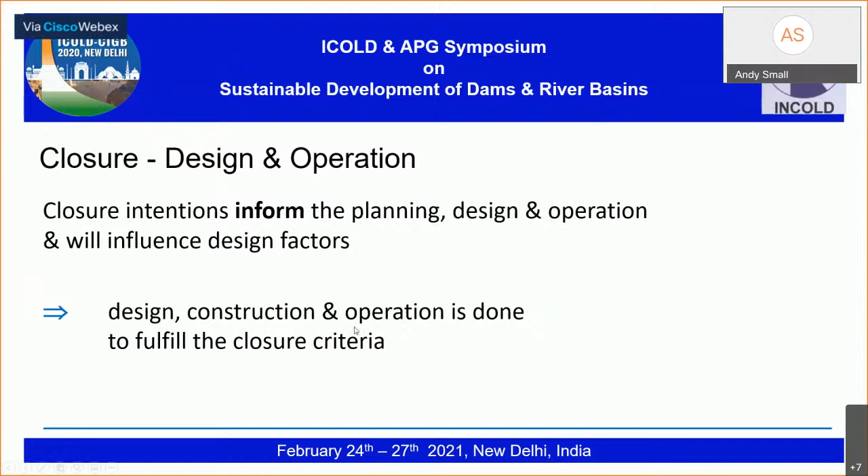The closure intentions can inform the planning design and will influence the design factors. There needs to be at least a conceptual closure plan done at the beginning, and then the design, construction, operations over the life of the mine are done to fulfill the closure criteria.

Again, looking at these requirements, physical, geochemical, ecological, and social stability, how are they met? Well, different technologies are available, and we often hear about filtration and dry stacking as being a panacea. It's great in some cases, but not in all cases.

For acid generating tailings, processing can be undertaken to remove the sulfides, but yet you still have the high sulfide material that has to be dealt with. So there's these great technologies that are out there. Co-disposal with tailings and rock is helpful, but not all of them work for all conditions, and they have to be evaluated on a site-specific basis.

Planning a landform. I wish to speak about the landform term for a moment. The landform term that's being used here is really speaking to the shape of the surface at the end of the facility, at the end of the life. Drainage patterns and non-erodible surfaces, and having it shaped so it may look like the natural terrain.

There is sometimes the term landform being used for those structures which would no longer be considered a dam, which have no liquefiable contents within them. But truly, I think the term landform is best saved for the surface features at the end of the day. You could put all these great features on top of facilities which still have liquefiable elements in them, still would meet the definition of a dam, but you can still make it look like the natural terrain.

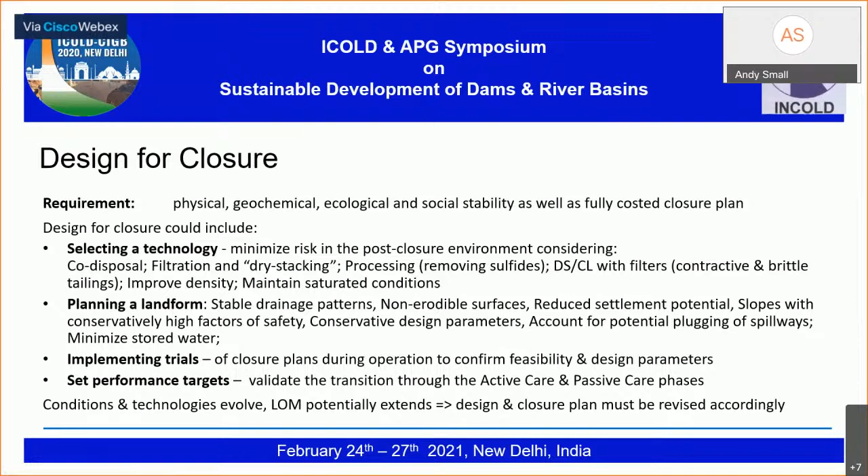In terms of the responsibility for closure, we have to recognize that mining companies are temporary users of the land, and that after we're done, it's society, community, and nature. We need to lead the process, but then the communication and so on needs to be undertaken with all the different stakeholders to make sure that the handover is effective.

All parties must make an effort to understand each other and see the challenges from all points of view. For example, some stakeholders need to recognize that certain demands may make the mine uneconomic. Is that necessary? That needs to be sorted out. So the decision on the final land use is a shared responsibility, where the mining company is holding the initiative, as there would be no need for closure if there was no mine.

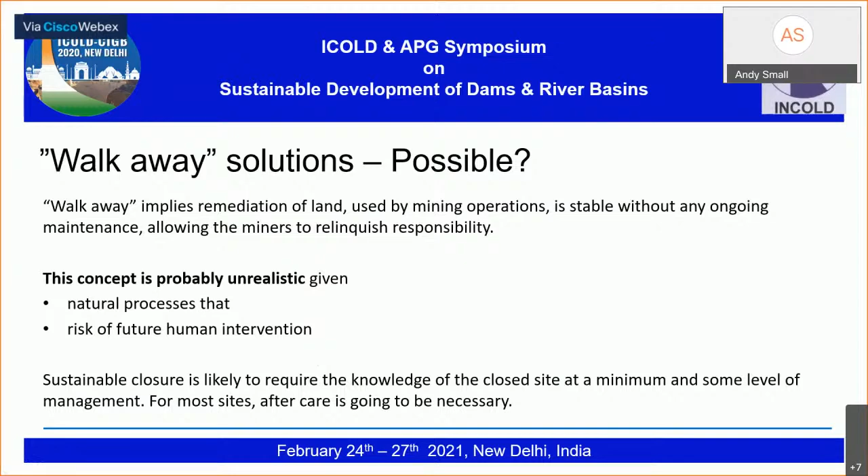So sustainable closure is likely to require the knowledge of the closed site at a minimum and some level of management. For most sites, we recognize aftercare is going to be necessary. The objective then is how do we minimize the amount of active care?

So in terms of state of the art, there's lots of documents out there, lots of initiatives going on. The Tailings Dam Safety Bulletin we're writing will not repeat all of that, but it will emphasize what we can, and fundamentally trying to remind the designers and owners that we need to identify a feasible closure plan in parallel with developing a tailings disposal methodology and planning for closure through all phases of the life, including constructing and operating the facility towards closure.

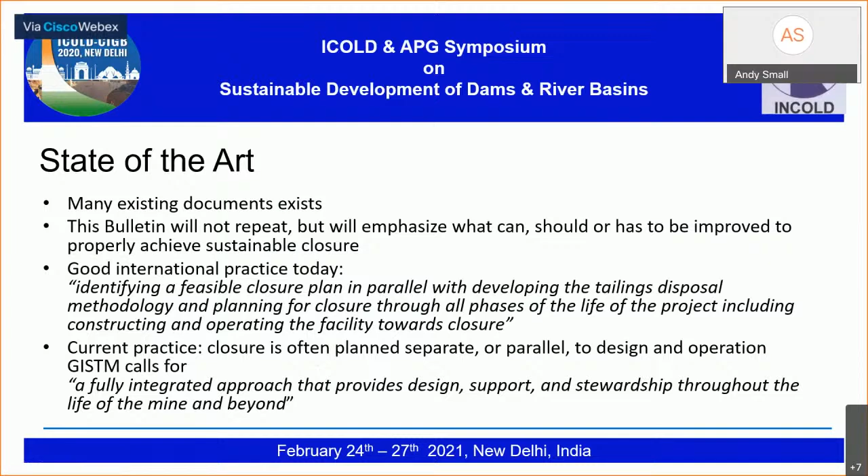So the current practice: closure is often planned separate or parallel to design and operation, but even the GISTM calls for a fully integrated approach that provides design support and stewardship throughout the life of the mine and beyond. So closure should always be the overarching guide, with the ultimate aim of establishing a stable structure, reducing risks, and ideally relinquishment of the mining leases.

So there are no other operations moving so many tons of material. How can we use those materials effectively?

That's it, Harvey. Yeah, I suppose if I could just add something, Andy. I guess the people listening might have got a bit of an impression, or wouldn't have got the impression we wanted to maintain originally, that our ICOLD committee thinks closure is a really, really important thing, and that's why we've put it up front.

And so we were intending to have the closure presentation early on in the piece to highlight this. Oh, good point, yes. Yeah, it's like chapter 3 in our bulletin, right? Yeah, that's right. And I think that last slide highlighted that it's about time we got real about it. And even if you are thinking that it's going to be remined, there's still no excuse for not coming up with a closure plan on the assumption that it might not be remined.

And I guess we can't predict the economics of the future, so we've really got to seriously think about what we're leaving for future generations, and really put an effort into planning the closure right from the start. Yeah, good, David. Thank you.

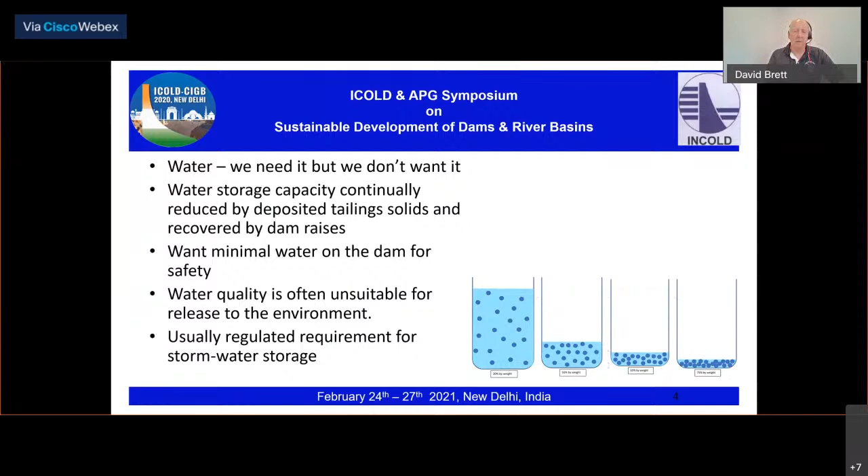Often the quality of the water is very important because of the environmental situation, and we usually have some sort of regulated requirement for storing water, because the regulator doesn't want to release water into the environment. So there quite often are requirements to store a very large amount of water on dams just to stop pollution from the sites. But in consequence of that, we potentially make our dams more unsafe.

So go to the next slide. Typically we have typical wet tailings disposal. We're trying to have a minimum water pond for settling fines. Then we want to have some temporary storage for normal seasonal flows, so we don't want to spill water every time it rains, so we need to have some sort of storage capacity. Sometimes if we're in cold climates, and obviously India is probably not one of these, we want to account for ice formation.

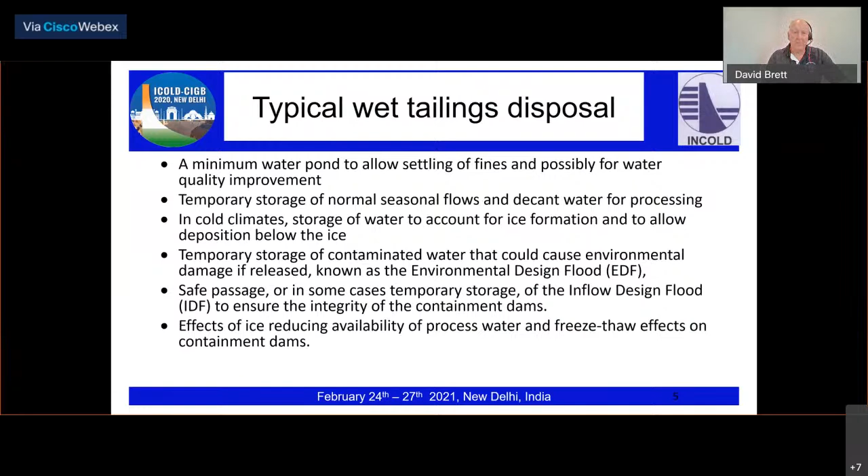And we might want to store environmental water - we might want to store water during a flood of a certain size to stop release of water that might cause an environmental impact. We also want to make sure that we don't risk failing the dam in a design flood, which we call the inflow design flood. And that's typically what we would use to size a spillway. Next slide.

So the inflow design flood is very important, and we did speak about that using the consequence assessment, the consequence category, to decide what flood we might want to use. There might be some other method of using risk assessment to determine what flood you want, but typically we use our consequence category.

So the inflow design flood is the flood we use for sizing our spillway and outlet works for extreme flood storage. And typically they would be determined in terms of their annual exceedance probability, or AEP.

The problem is, when we're talking about very extreme floods, it's very difficult to predict them, and in most places in the world, we only have 100 years or maybe a bit more in some parts, but still relatively short in terms of the record related to extreme events that we're trying to size. So extending our historical floods into the future for estimating very large floods is very difficult.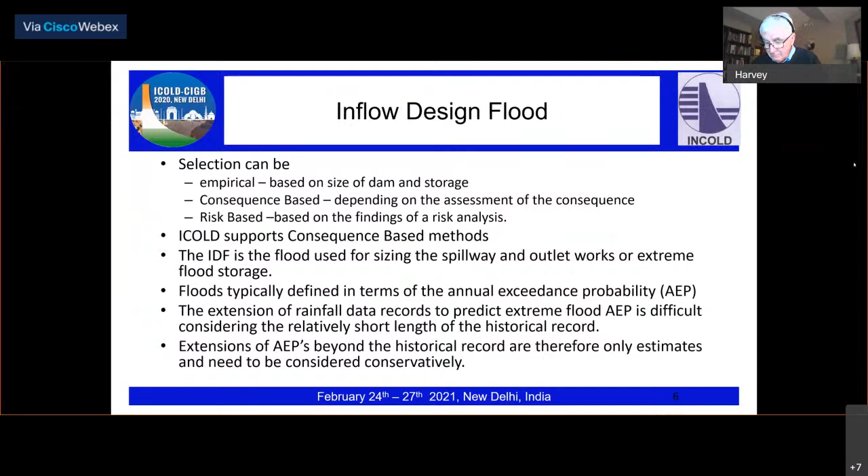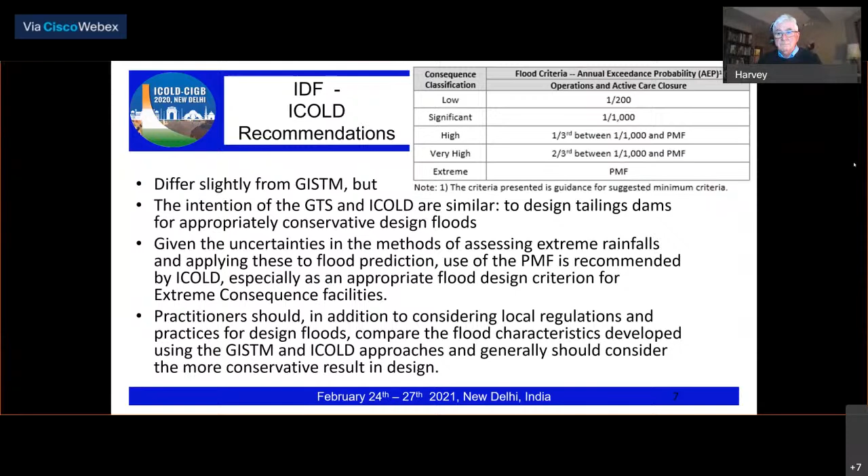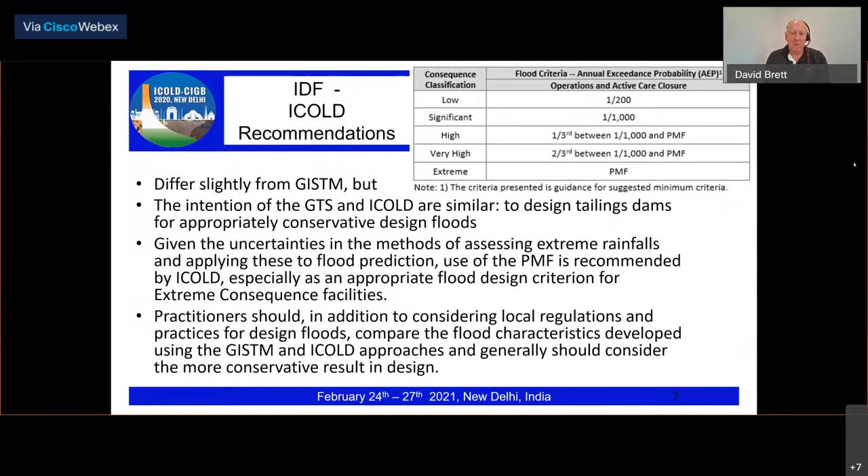So the ICOLD recommendations for the inflow design flood are slightly different to the GISTM, but only in terms of we think that we should be using the PMF, whereas the GISTM was considering a 1 in 10,000. But when you look closely at this, because of the uncertainties, they're probably not that much different in terms of what the intention is. So I'll just go to the next slide, I think it shows what I'm talking about here.

So this chart on the right shows design estimates for rainfall of different annual exceedance probabilities, and our records on the left-hand side of the chart are only between say up to 100 years of record, where we can get good rainfall data, and we can predict the rainfall for large flood events from maybe 1 in 50 to 1 in 100 type AEP. And then we can extend that historical data to predict floods up to, say, 1 in 2,000 AEP. But once we get higher than that, to predict from historical rainfall records, it becomes there's just too much unknowns.

And so we have a method of working out the probable maximum precipitation using scientific consideration of the atmosphere and how much water it can hold at different locations and different conditions, and get an idea of the actual extreme rainfall that could occur, and then we can interpolate between those to work out probable very, very large events. But it becomes very difficult to know, to talk about the difference between a 1 in 10,000 or a 1 in a million type of event. So I think we just have to recognize this uncertainty and be conservative in what we use.

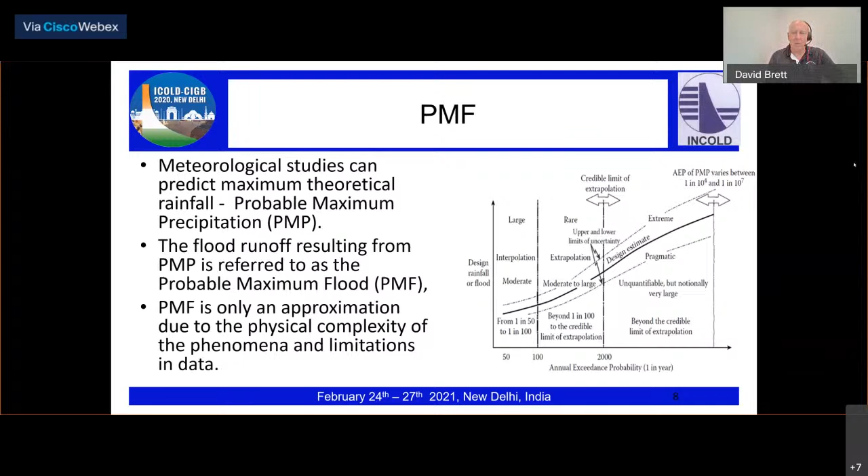The question of spillway versus storage is a pretty interesting one, and obviously with the water dam we were able to provide a spillway to take care of the floods, but often in our tailings dams there's pressure not to release water under any circumstances, and so this leads people to have to consider storing water in the dam for effectively the same condition that a spillway would perform with.

So I think this is a very difficult question, and where a spillway is not provided, it's really important to think about the inflow design flood and not necessarily take it as the same as the spillway design, but maybe you have to think of different situations that could end up with a worse situation in terms of multiple extreme storms. The emergency response capability of getting water out of the dam if there was an extreme storm event, and the availability to actually do any work during these sorts of events that we really haven't experienced ourselves.

So it's hard to understand how difficult it might be to get people to site to operate pumps to get water out and things like this. So to me, the bottom line is we have to prevent overtopping and really seriously think about how to do that. Okay, next slide.

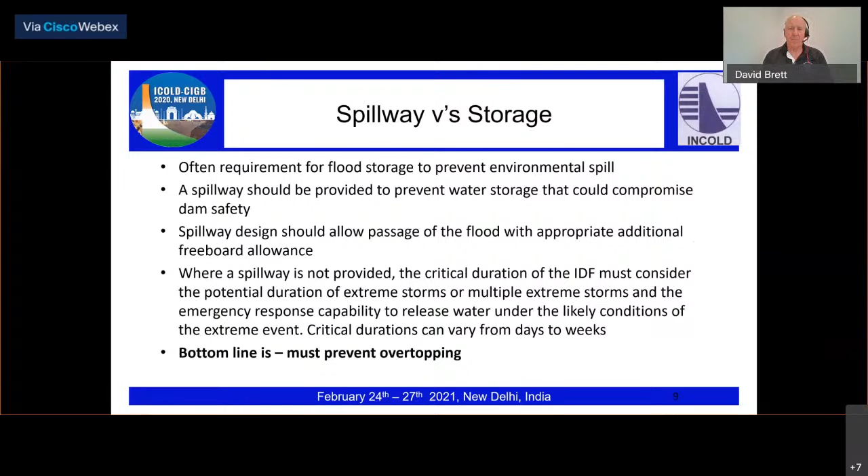Next thing is this environmental design flood. The intention of this is it's the flood to be managed without release of untreated water to the environment. And this is to allow for this environmental design flood, we have to allow a storage capacity above the normal maximum operating level of our dam.

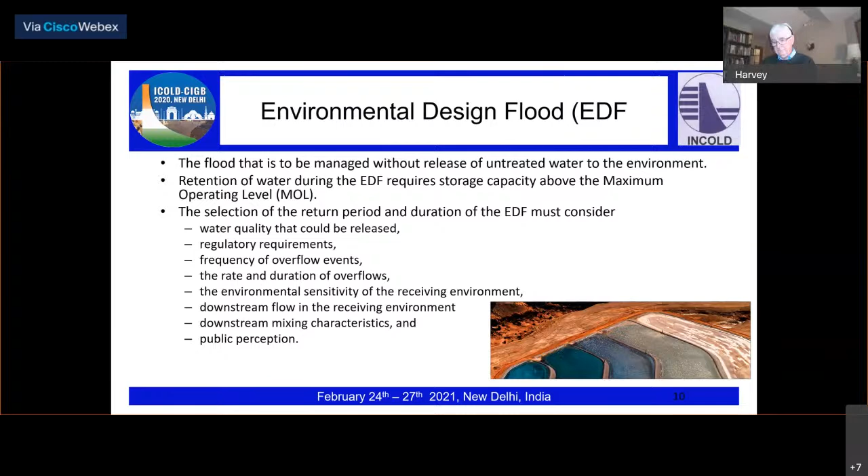And things that we need to consider in that are the water quality that could be released, regulatory requirements, the frequency of overflow events, the rate and duration of overflows, the environmental sensitivity of the receiving environment, the downstream flow in the receiving environment, and the mixing characteristics, but also public perception. So it's quite a complicated and many variables to consider when we're thinking about this, because once again, adding more water to the dam is likely to actually increase the risk of something going wrong with it.

So selecting the EDF, I've discussed some of these things. There's typically, it would be something that would be imposed from the regulating agencies as to what it might be.

We need to then look at the environmental situation and particularly the mixing zones and dilution that might occur during flood flows. So by the time you have a very large flood, maybe the environmental impact is not as bad as it would be if there was release in a dry situation. So in Australia, for example, we do have some cases where we are allowed to release water during flood events, but not during normal dry conditions where the stream flows are very small. But typically the environmental design flood might be with a return period or an AEP of 1 in 10 or 1 in 200, something like that.

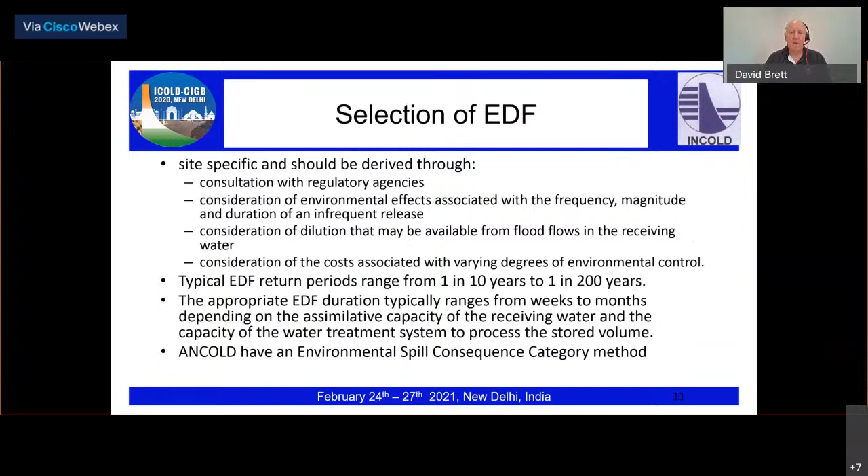And the difficult thing then is to decide what sort of duration of event you should consider, but it's likely to be weeks or months depending on the importance of the receiving water. ANCOLD in Australia do have an environmental spill consequence category method, which is where you use a similar consequence category to the dam failure that we've been talking about earlier today. And we were going to give some advice on that in the ICOLD bulletin.

Maximum operating level was another water level to consider. If you're going to have water safely stored in the dam, we really have to make sure that the dam is designed to store water. So a lot of upstream constructed dams really are not suitable for storing of water against the perimeter.

When you think about doing upstream construction on top of tailings, it's pretty obvious there's going to be consolidation and settling. And there's been numerous cases that I've seen where you end up with cracking of the upstream lifts, not only longitudinal cracking, but also transverse cracking across the dam walls. And upstream construction, there's no filters. It's very difficult or impossible to design an upstream construction with filters. So they're really, for various reasons, not suitable for storing water.

So it's pretty important that if we are going to store water, that might mean you have to think seriously about what type of dam you're going to use. And importantly, if you do set a maximum operating level, that's what it should be - it should be the maximum operating level. And if you get to that, then you should have a TARP that would allow you to probably stop the whole mining operation or the process plant operation until you can get that operating level under control.

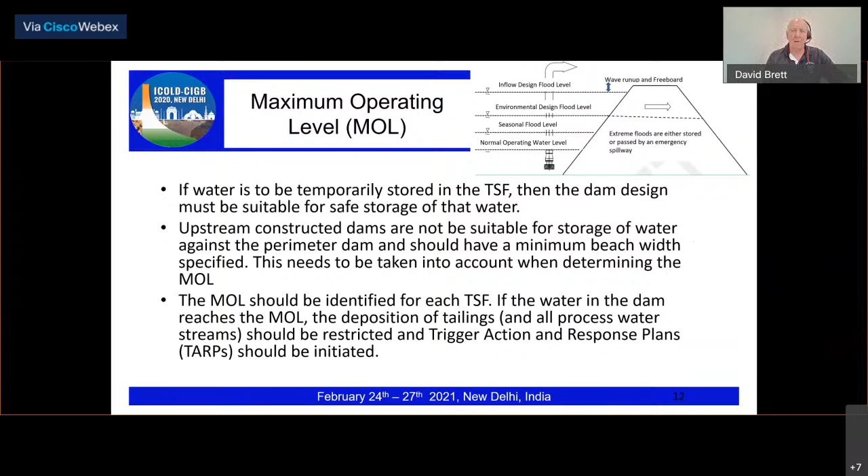Water balance is a very critical thing in hydrotechnical design. And what we mean by that is the ongoing balance of water across the facility, losses and inflows. So what we've got is transport water, which is probably the biggest component.

Stream management, often there needs to be diversion of clean water from the surrounding catchment areas. Precipitation, so rainfall and the runoff that you'd normally calculate by normal hydrological methods. Decant water, so we're normally taking water back off the dam to use in the process. Evaporation and seepage. So there's a lot of components. Some of them are very difficult to estimate, such as seepage and evaporation. Evaporation is potentially quite different to evaporation from water ponds because we might have a high salinity that affects the evaporation.

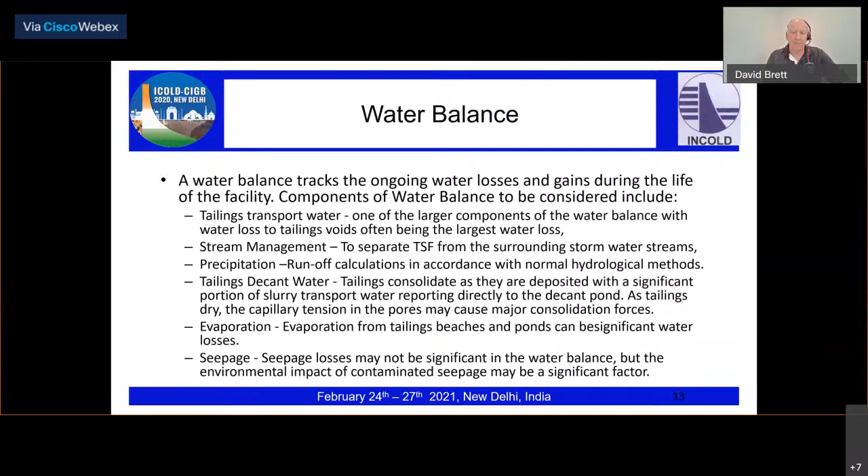But it's very important that we do get the water balance correct. And once you've set up a water balance, you need to really be monitoring it over time to make sure that you've got it right, because where we come unstuck, some of these dam failures occur because the water balance hasn't been under control, and so water is building up.

So take-home messages on this aspect to me are: be conservative with water management. Really make sure you understand how much water you've got. Try and minimise the water storage on dams. There's obviously going to be a balance between environmental requirements and how much water you store, but from the dam safety point of view, the less water we have, the better. I mean, I think spillways should be provided.

It's not always the case, but if we don't provide spillways, we've got to be very careful in assessing how much storage capacity we need to provide to make sure there's no risk of water overtopping the dam. And upstream construction is not suitable for water storage, except in particular ways where you might be able to store limited amounts of water within the tailings beach, but not allowing water to get anywhere near the external embankments.

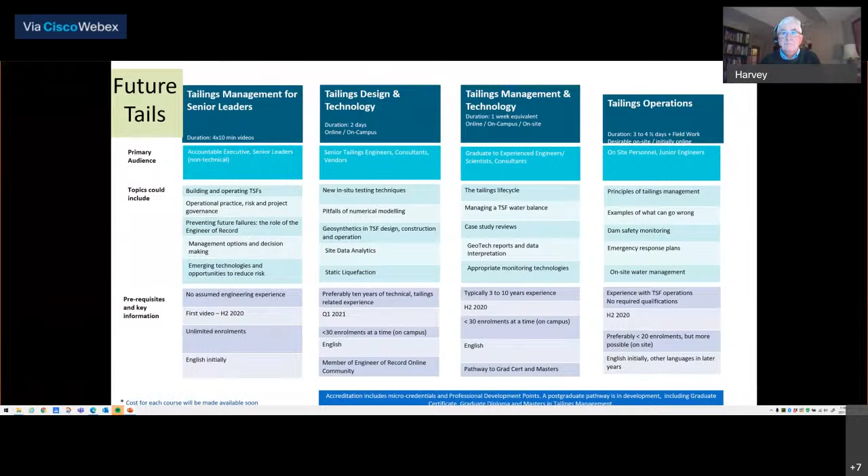The other one, Australasian Institute of Mining and Metallurgy, has the Tailings Management course. It's a 1 to 6 week online course with 6 modules, covering introduction to tailings management, geotechnical considerations, geochemical and water considerations, governance and surveillance, closure, and socioeconomics. So that's another example of an online course available for people to start learning more about tailings facilities.

And the last one I'll describe, one I've been heavily involved with for the last few years: Glencore, the largest mining company in the world, is developing what's called a Tailings Manager Academy. It's a university-style model, with theory, expert moments, case histories, case studies, interactive exams, and it's all online, probably somewhere between 10 and 20 hours depending on what level you're at. It covers all the things from principles, tailing dams, properties, governance, site characterization - pretty well all the elements you see in the Icold Tailings Dam Safety Guideline that we're producing.

And lastly, we went into stakeholder engagement and public disclosure. So this course has 12 modules, 3 levels - one for operators, one for managers, and primarily the whole course is focused on the responsible tailings facility engineer. That's your responsible engineer at the tailings facility, who has to know enough to talk to consultants, know enough to talk to regulators, and understand what's going on with their tailings facility. So it has quite a high level of technical content.

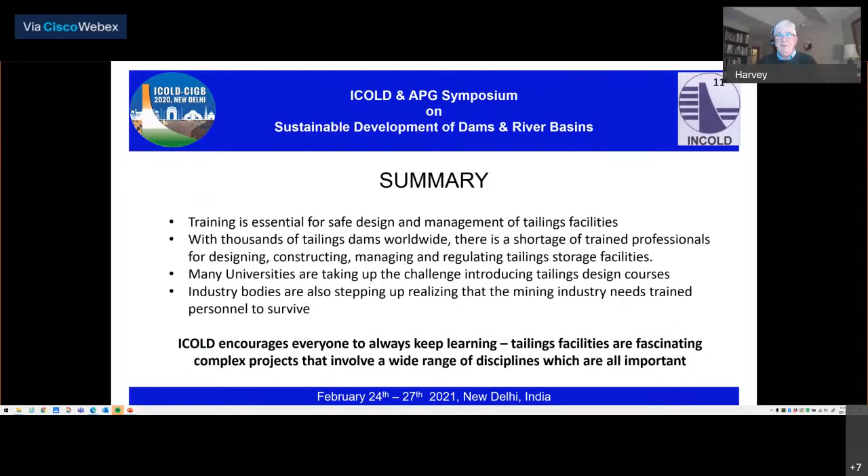And like Dave, ending on water management - I always joke that if we didn't have water, I would be out of a job. Water controls everything, whether it's in the pore water of the tailings, or whether it's overtopping a dam. The management of water is one of our biggest and most critical challenges to do safely. I'll ask my colleagues on the line if they have a few closing quick words or not. But I think for the formal part of the program, that completes the symposium. I do want to thank everybody, and especially all the hard work that went in by the presenters.

Yeah, I think your summary is very good, Harvey. I have nothing more to add. Okay, yes, I agree, Harvey. I think that was a very good wrap up, and I agree wholeheartedly with what you've said, and hope the message has got through to some people today. Well, thanks very much, everyone, and thank you to the co-host. So we will look forward to seeing you in Marseille later this year, COVID willing. Thanks, okay Harvey, bye all. Thanks very much. Bye.